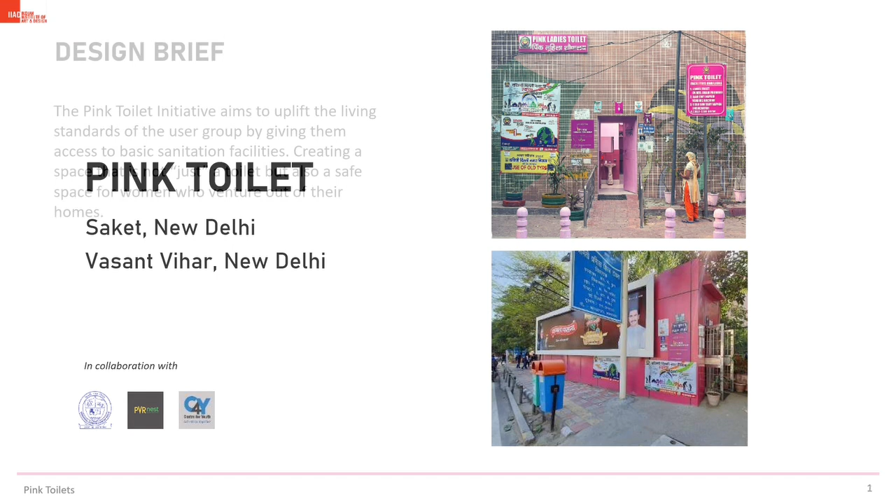The Pink Toilet Initiative aims to uplift the living standards of the user group by giving them access to basic sanitation facilities, creating a space that is not just a toilet but also a safe space for women who venture out of their homes. The task at hand is to redesign the toilet into a socially inclusive space for women of all strata of society.

It provides a space for resting, social interaction, bathing, menstrual hygiene, maternal care, and using the toilet, all of which is to be maintained with minimum efforts on the part of the attendant and is efficient in energy usage. The space needs to be ergonomic in design to enhance its functionality, providing adequate privacy and comfort for users.

The stakeholders in this project are Indian Institute of Art and Design. Our institute's mission is to bridge gaps and build bridges between design, society, and industry by transforming how design is taught, learned, and practiced in India. Center for Youth, which is an NGO working for the welfare of the rural and urban youth.

PVR Nest. It's a CSR initiative by PVR working towards building a collaborative society by extending support to the vulnerable sections. South Delhi Municipal Corporation. It has introduced aspirational features in public toilets with all necessary parameters and they are well maintained by female staff.

We now move on to what exactly is a public toilet. A public toilet is a room or a small building with one or more toilets that is open to the general public. They cater to the requirements of everybody traveling through, whether a resident or a stranger. Public toilets are not maintained properly, sanitary pads are unavailable, and they are also not socially inclusive.

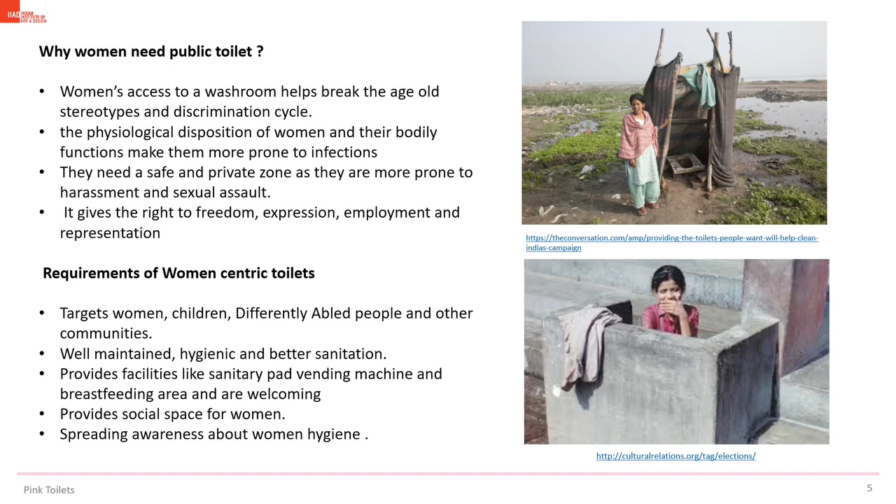Parameters. It should be easy to locate and accessible to all, including people who are differently abled. Create a functional and ergonomic toilet, which is well segregated, ventilated, and private. Provide a zone for bathing and self-care, and also provide social interaction and childcare. Provide facilities for menstrual hygiene such as incinerator, dispenser, and taps and cubicles for cleaning up.

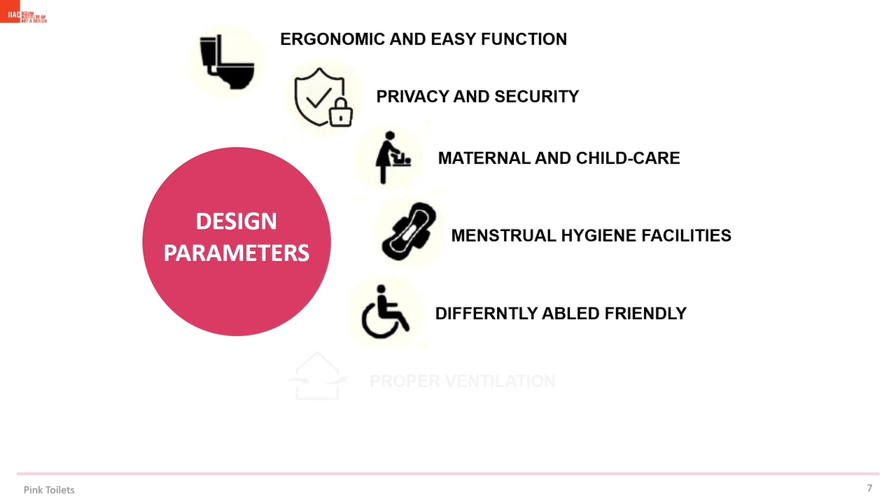These design parameters were considered through interviews, survey, and observations. We start with ergonomic and easy function, privacy and security, maternal and childcare, menstrual hygiene facilities, differently abled friendly, proper ventilation, hygiene and cleanliness. The dimensions for spaces have been taken into account after considering the national and local standards.

And now, let's lead you to the site context of both sites, starting with Anupam Saket. With our background established, let us introduce you to the context of our site. Our site, the Pink Toilet, is located in Saket, South Delhi, next to PVR Anupam. We studied the 500-meter radius around it.

Right next to our site, we have PVR Anupam in the Anupam market. The back exit of the PVR, the market staff, shop owners, and visitors are a major contributor to the crowd that uses our Pink Toilet. The presence of parks also attracts crowds which can serve as a source of potential users. We also receive users from the residential buildings mainly in the form of house help.

Various commercial buildings such as banks and offices are also spread across our location. Multiple schools are present in our area, the major one being Gyan Bharati School, along with various temples. The Press Enclave Marg along with the Mehrauli-Badarpur Road are the two major roads that serve our Pink Toilet. They merge into the Pramod Mahajan Marg, which directly leads up to our site.

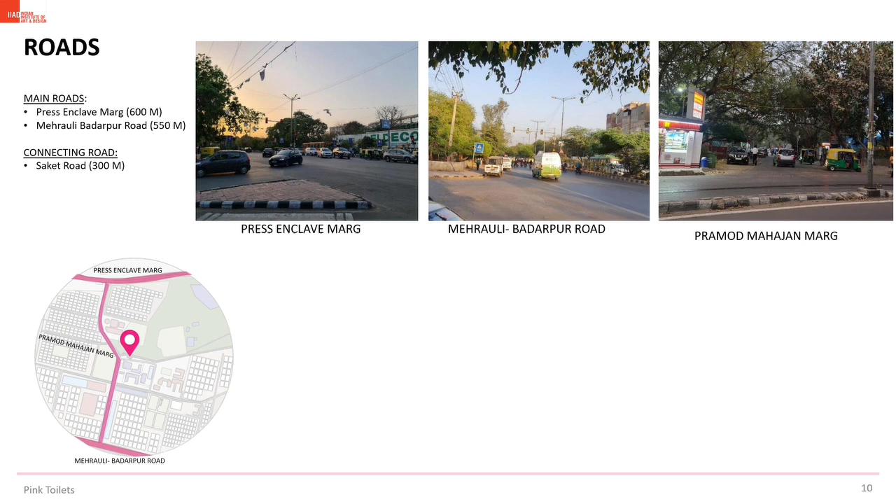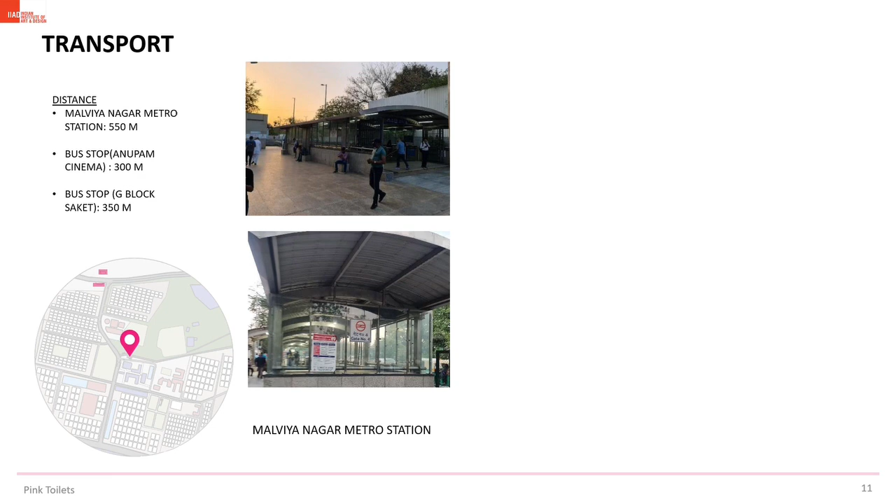Saket Road, a major internal road, also leads up to our Pink Toilet location. There is a community center road diverging from Saket Road which has less traffic leading to our site. Various public transportation modes provide connectivity around our location, which includes the Malviya Nagar metro station on the Press Enclave Marg, along with 4 bus stops, out of which 2 are located on the Pramod Mahajan Marg called Anupam Cinemas, while the other 2 are located on the Saket Mandir Road called G Block.

The site does have some problems. It's located with a temporary settlement on its left, a men's washroom and a garbage collection center on its right, and an open sewer right behind it. It thus does not have the cleanest surroundings.

The sunken courtyard leads to a stagnation of water which is amplified by the limited number of floor traps available for cleaning. The open courtyard also brings the walls in direct contact with water, leading to problems like seepage and mold.

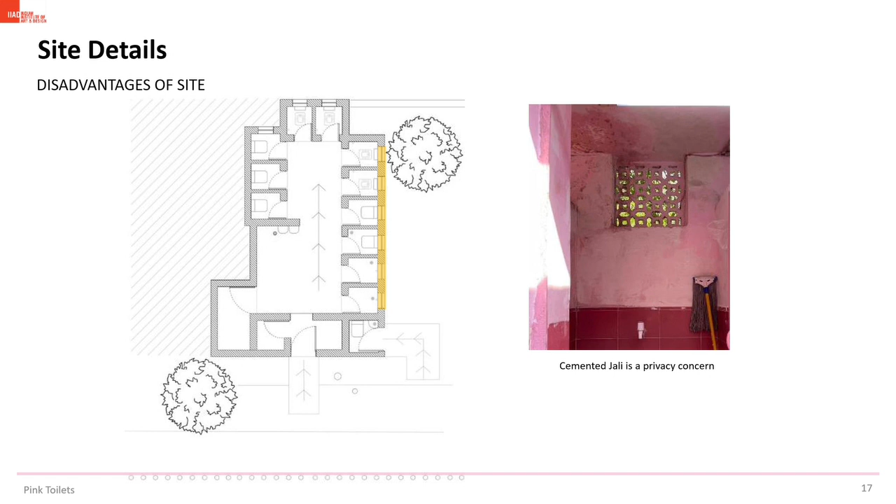The open wet area creates a humid environment in the summers, which is ultimately an unpleasant experience for the users and attendant alike. The cement jaalis given for ventilation prove to be a privacy concern because of their dimensions and positions in the washroom stalls. Storage solutions for the attendant's or the users' belongings or cleaning supplies are not present at the site, leading to makeshift arrangements which are unsafe and inadequate.

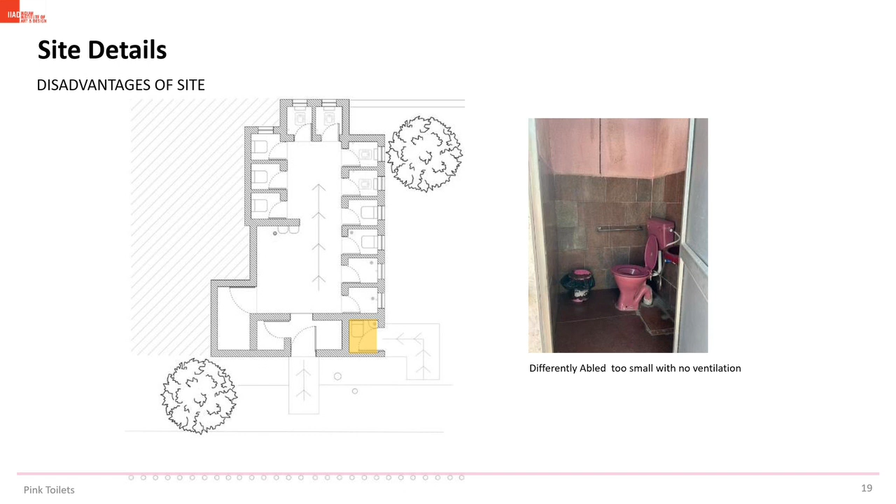The stall for the differently abled does not have enough space to fit in a wheelchair, and it doesn't cater to their needs properly. Additionally, there is no form of natural or mechanical ventilation in the stall itself. The water pipes at the site are currently exposed, making them prone to damage and a huge hygiene and maintenance issue. Although the menstrual hygiene facilities at the site are available, there is no information or awareness of how to use them properly, making them redundant.

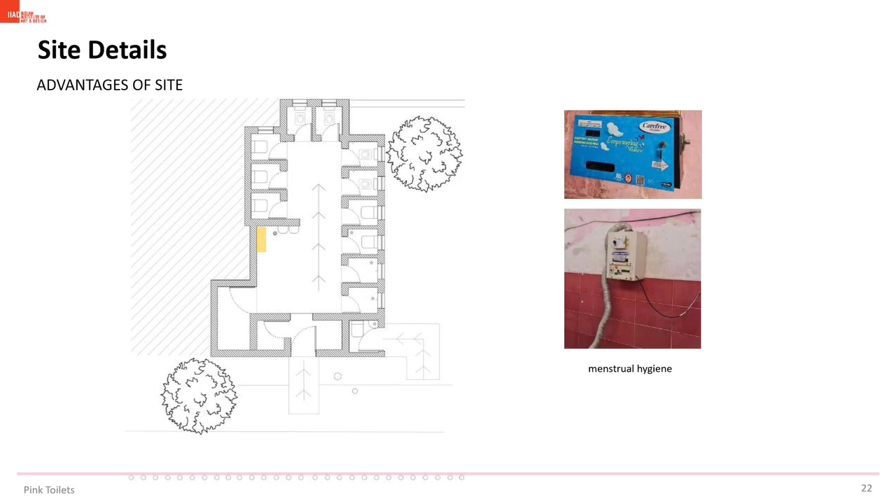The site also poses some advantages. The open courtyard ensures that there is a continuous flow of air through the site, keeping it ventilated. It promotes proper menstrual hygiene by providing facilities like a sanitary napkin dispenser as well as a pad incinerator for proper disposal. The choice of picking between a Western and an Indian toilet is also given to the users based on their preference.

Based on the factors we just described, we came up with two proposed plans that we thought will be the most suitable for our site. And this is the first one out of them. This plan has 9 cubicles just like the current site, except the number of Indian and Western toilets has been changed. Instead of 4, we now have 5 Indian toilets, and instead of 5, we have 4 Western toilets. This change was mainly due to the survey and interview responses, where people said that they prefer Indian toilets over the Western ones due to the low contact.

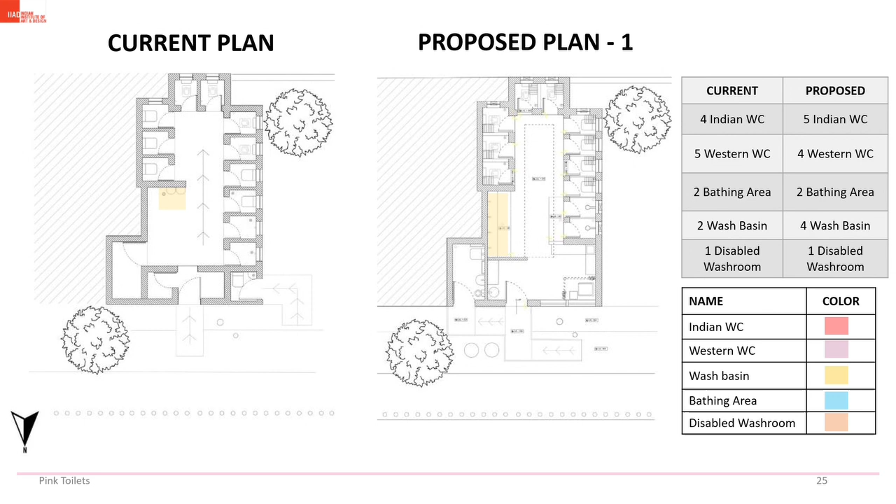The number of wash basins was also increased from 2 to 4 with 1 wash basin per 2 cubicles, while the number of the bathing areas and the differently abled washroom remains the same. Our plan is effectively divided into a wet and dry zone, which ensures that the water from the wet zone doesn't penetrate in the front of the washroom.

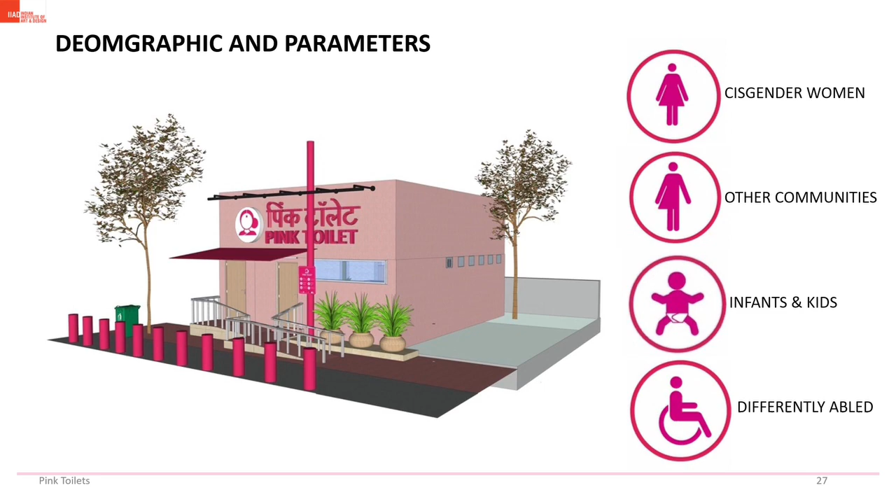From the very beginning, it was ensured that this design fulfilled the needs of all its target audience, that is cis women, other communities, children and differently abled individuals, and also provides them with a sense of security and privacy. That is why, right at our entrance, we have an ergonomic ramp made according to government guidelines with a comfortable slope that can be used both by the differently abled and the regular users.

Leading from the ramp is a differently abled and kids washroom. Since not many differently abled users approach the site, we turned it into a universal zone that can be used by the differently abled, mothers and kids. During our survey, many kids from the surrounding slums expressed a fear of falling into the adult-sized toilets, and that is why we provided a smaller size toilet for the kids.

This washroom is also equipped with a diaper changing table. The washroom itself is made following all the government protocols and has adequate space for the wheelchair to turn around and for a caretaker to accompany the child. Standing right outside the entrance to the main washroom, you will observe that there is no visibility inside the space from the exterior due to the presence of a partition wall. This wall ensures the privacy of the users.

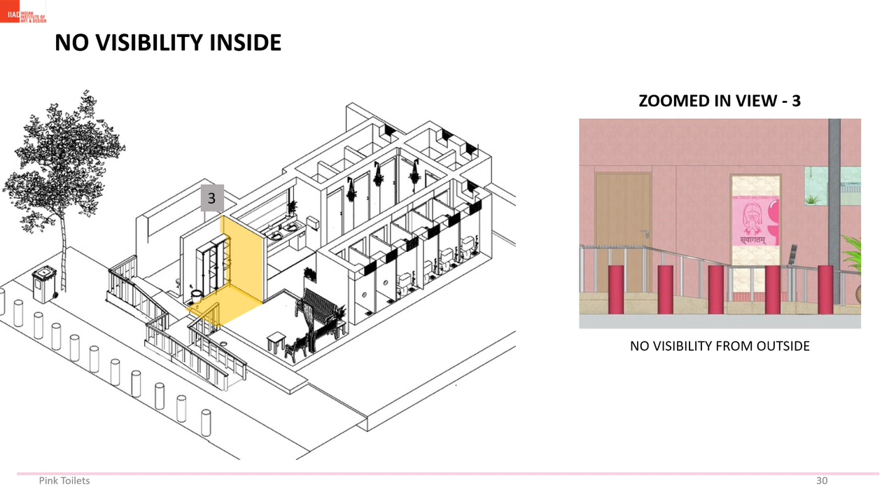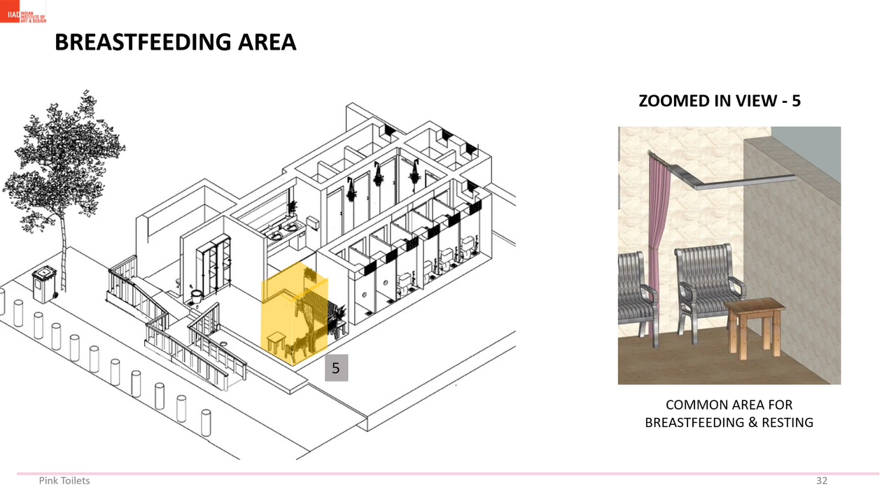When you step foot into the washroom, you will be entering a sitting and resting zone. This consists of benches with back support made with stainless steel, which is easy to maintain in the moist washroom environment. The objective of this area is to encourage positive social interactions. A half partition wall separates this area from the rest of the washroom. A curtain with a rail is also provided that can transform this social space into a private zone. This is mainly intended to be used for breastfeeding and resting.

Located here itself is our attendant area. This is oriented in a way that she has a constant view of the entrance and is able to supervise those coming in and going out.

Going forward, we have our 2 bathing areas that can alternatively be used as a wet and a dry zone. Since most people coming to shower come during the early hours of the day, during the later half, the attendant could divert such crowd to one of the cubicles while the other one can be used for changing.

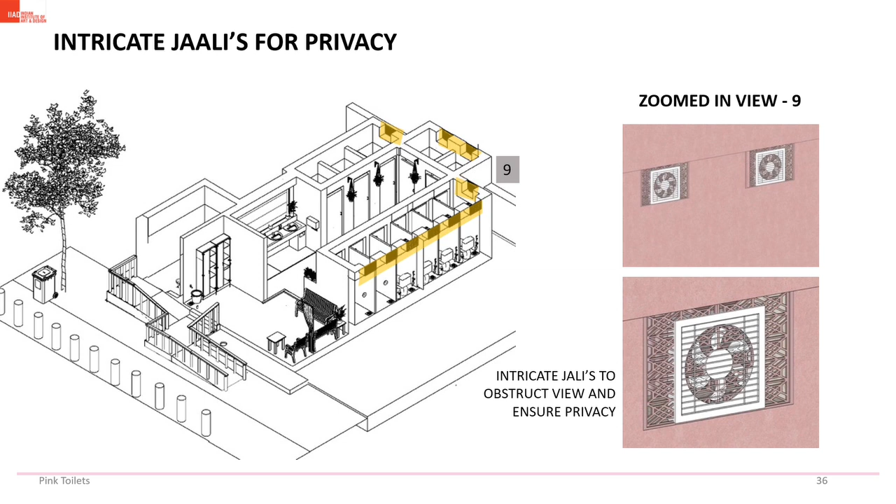The doors of our cubicles are strong, sturdy, with good quality locks, while our wall openings are fitted with intricate jalis which allow ventilation without giving a view inside the cubicles. This further creates a sense of security amongst the users. The cubicles itself are ergonomic and functional, wherein our door sizes were adjusted and opened inwards so as to not obstruct the circulation outside, while also giving space to the person inside to open and close the door.

While the needs of the users are often taken care of, sometimes the needs of the people working at the site are ignored. That is why in our design we ensured that the needs of the attendants are considered. Hence, we provided a janitor's closet with a tap for filling bucket. This is adequate storage for all the cleaning chemicals and the personal belongings of the attendant.

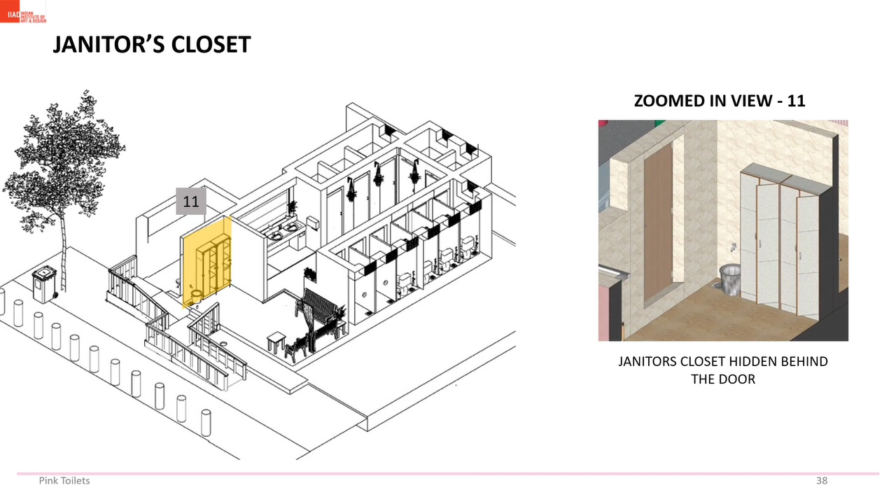Other facilities at the site include provision of pad incinerators, dispensers, and taps within the cubicles for women to clean up during their menstrual cycles. Racks inside the cubicles to store the larger handbags that women often carry, along with door hooks. Provision of perforated rubber mats on a recessed floor below the wash basins and outside the bathing areas to catch water spillage and prevent water tracks across the washroom.

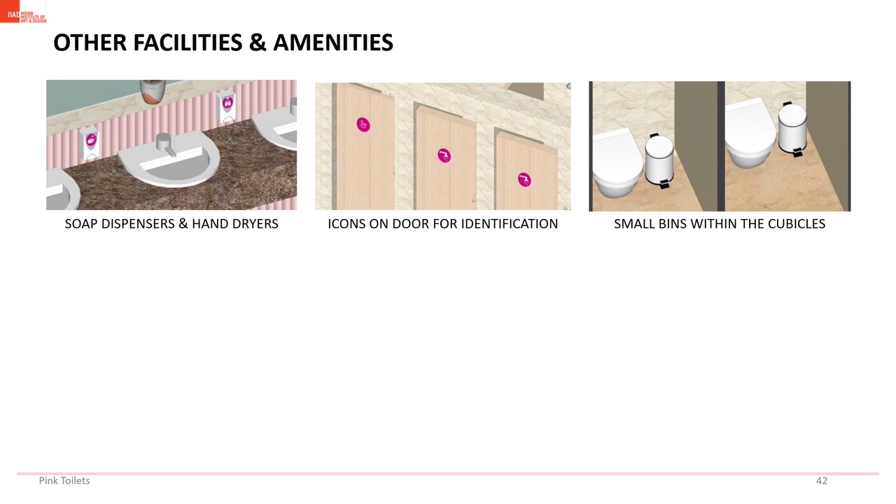Provision of hand dryers and soap dispensers. Icons on the cubicles so as to inform the users about the facilities available inside. Bins in every stall for disposal of sanitary napkin, along with dustbins below the wash basins to throw the tissues, and plenty of space to put up the posters.

Our site has an open courtyard typology which makes us prone to a lot of issues. In contrast, we are proposing a sloped roof made with polycarbonate sheet resting upon an aluminium frame with louvers and exhaust fans. This transparent sheet will block the rain, preventing waterlogging, allow the daylight to enter the site while diffusing the sunlight, thus reducing the heat ingress, while the louvers and the exhaust fans will eliminate the stench that comes from the surrounding garbage collection center and drain.

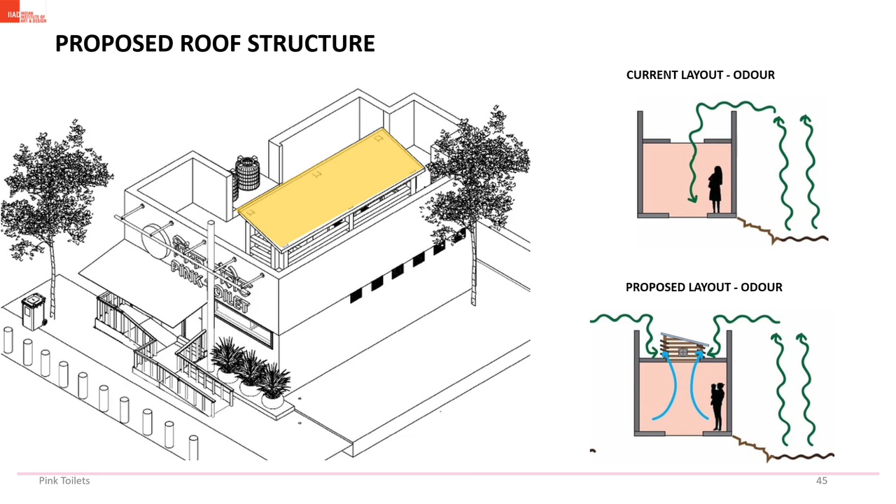Our attempt to make our site low maintenance went beyond just design and also assimilated with our materials. We used vitrified anti-skid tiles as they are suitable for rough use, considering the heavy footfall that comes into the washroom. For the walls, we used porcelains as these surfaces do not receive a lot of pressure and hence are not prone to cracking and chipping. The warm tones and pattern give a washroom a richness compared to the typical antiseptic look associated with the public restroom.

We went with ceramic wash basins and toilets as they are affordable and easy to maintain, while the push-button brass taps with a foam flow save water and give a satisfactory user experience. All this was kept on top of a granite slab to provide the users a space to keep their belongings while washing their hands. We used HPL boards for the bathroom doors and partition as it's waterproof, scratch resistant and durable while also being affordable, while our janitor's closet is made with waterproof plywood.

For the accents, we continued to use our signature pink to create a connection between the brand name and the interiors. While for the plants, we use spider plant, which reduces the amount of formaldehyde present in the environment, a toxin commonly found in bathroom cleaning chemicals.

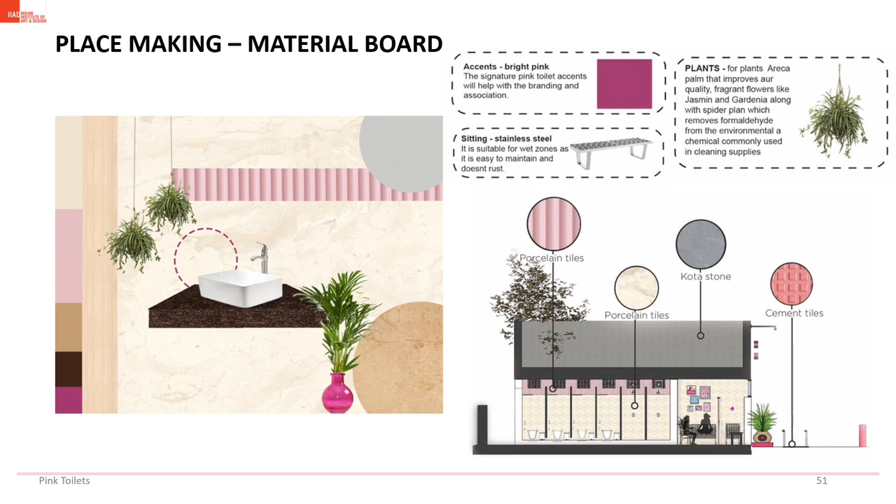For our roof, we used unpolished Kota stone as it's affordable, non-porous and its unpolished surface prevents slipping. For the walls, we use cement tiles as they are affordable and easy to maintain while also being porous and hence they allow the walls to breathe, preventing mold growth and regulate internal temperature. The checkered cement tiles have also been used on the footpath and the ramp as they are heavy duty and improve the grip while walking, while aluminium sheet has been used for the roof overhang to block the rain and light.

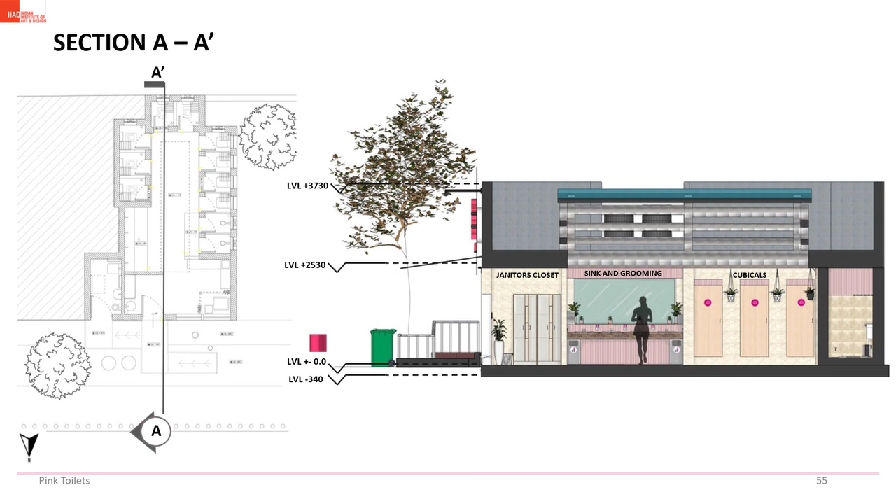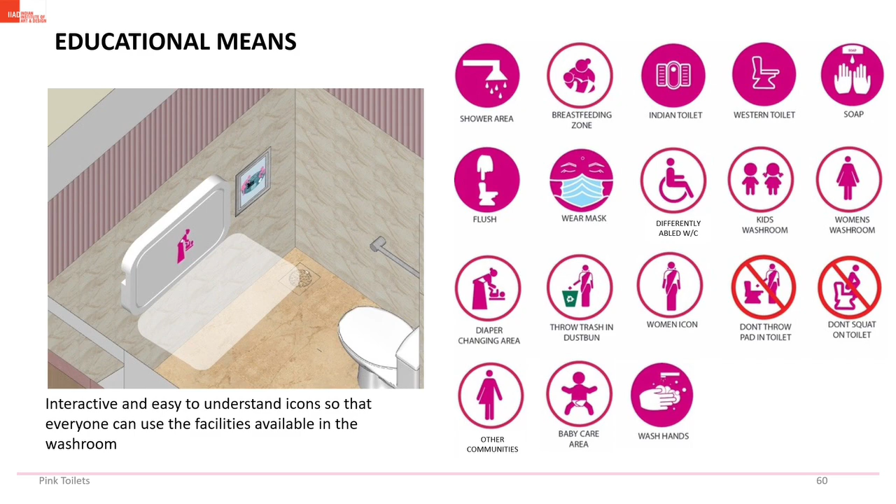We have also placed interactive and easy to understand icons all over the washroom so that even somebody who's illiterate will be able to understand these and use all the facilities within the restrooms. We also placed manuals on how to use the pad incinerators and dispensers in both Hindi and English, while inside the cubicles, A4 size posters have been provided right at the eye level so that the users can give it a read while using the washroom.

These cover a wide range of topics ranging from breast cancer awareness to encouraging women to use our pad dispensers, women education, childcare, menstrual hygiene, and so on. Our site has several advantages when it comes to lighting due to the open courtyard typology and because of the fact that it's not open beyond 7 p.m.

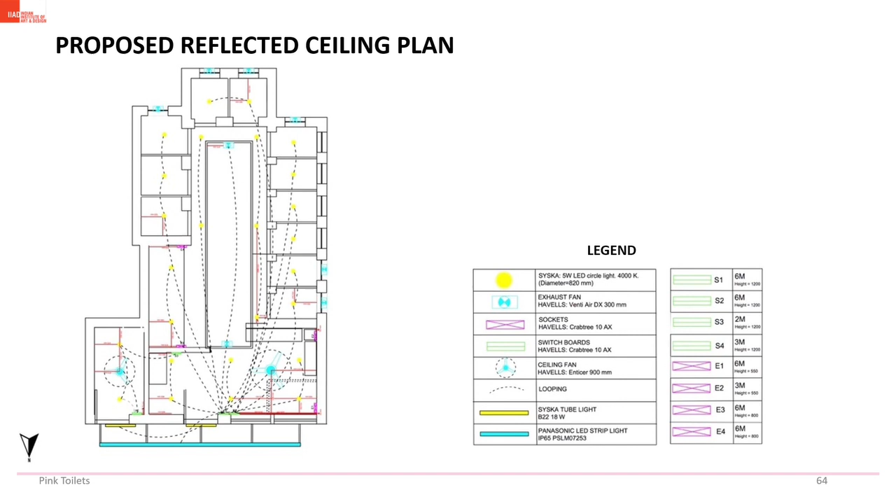However, we do realize that the option as to whether to use these lights or not should be left upon the users. That is why we provided adequate lighting throughout our washrooms. We also provided fans on top of our resting areas to ensure that the people sitting there are comfortable, and we also ensured that our entrance is well illuminated.

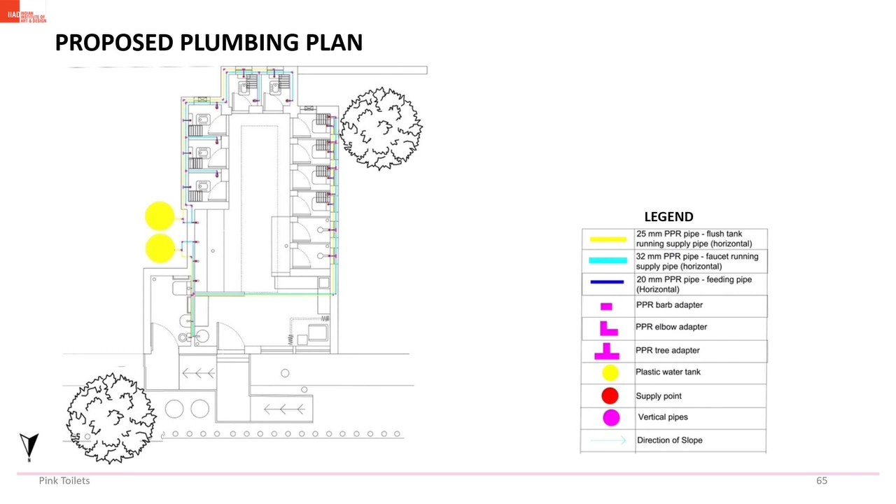Our current plumbing is very old and we are unsure of its conditions. That is why we are proposing a new and improved plumbing consisting of 2 pipes that supply the flush and the faucets for an uninterrupted water flow. At the current site, most of our inspection chambers are located inside the washroom, which creates a problem whenever a plumber needs to come in. That is why we ensured that all our inspection chambers are located outside the site for the privacy of the users.

All in all, our redesign plan has a well-defined and ergonomic entrance which caters to privacy, has an ergonomic kids and differently abled washroom with a well-defined sitting area, an area for self-grooming, along with functional cubicles, overall making it a better design than the one we have at our present site. Now that you're familiar with our first plan, let us show you our second one.

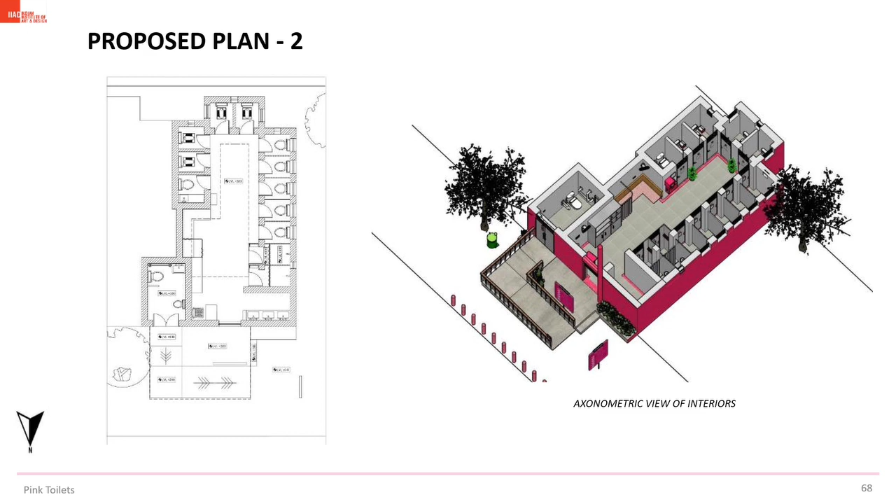This is our second proposed plan. It has been designed considering all the shortcomings discussed in earlier slides, and we aimed at utilizing every space to its maximum ability. As we compare the current plan with our proposed plan, you will notice an addition of a Western WC, an inbuilt sink in one of the stalls, and the provision of changing rooms attached to the existing bathing areas.

Moving ahead with many more such facilities, you will find hoardings placed outside the toilet for easy identification of the site. The hoarding facing the main entrance mentions all the available facilities within the toilet, and its back provides you with all the necessary women helpline numbers and the job vacancies available nearby. This hoarding has another very important purpose to solve, that is, it acts as a barrier for the passerby to look directly into the toilet, thus maintaining privacy.

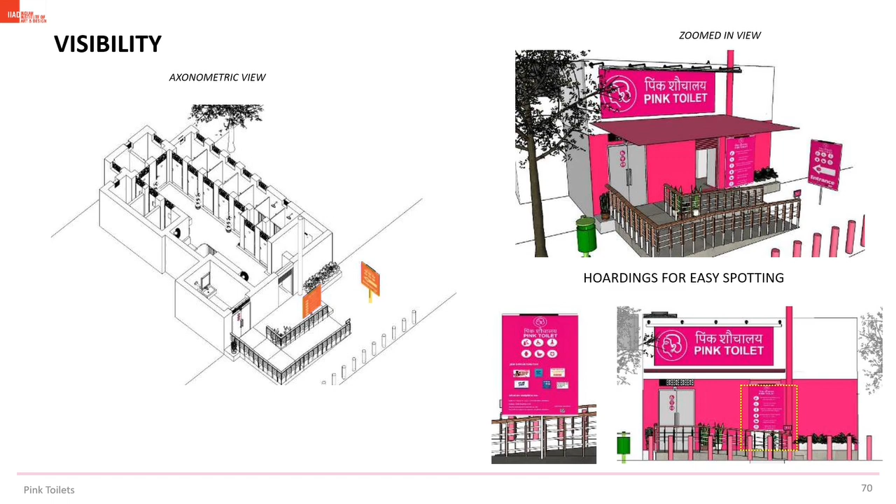Considering everyone's comfort, we've even proposed a differently abled ramp designed as per the standards. Its slope is gentle enough that a differently abled person can easily access it without anyone's assistance. After walking up the ramp, you'll enter the differently abled and kids washroom. This stall has enough space for a wheelchair to enter and move around to access various facilities. With the WC's proper sizing and supporters provided, the toilet becomes efficient enough to be used independently by its diverse users.

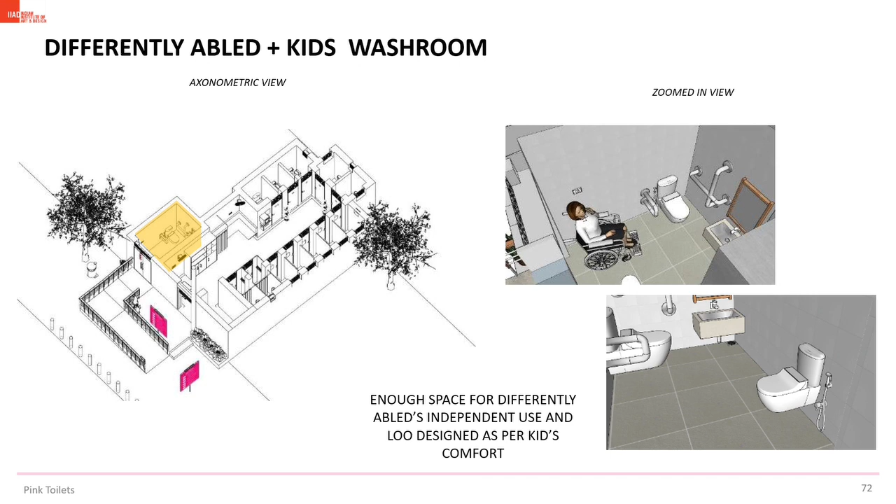Now, as we move through the main entrance, you will find the attendance counter on the left. It is positioned in a way that the attendant gets a clear view of what is happening inside as well as outside the toilet. She is aware of who all are entering the toilet and what all activities are taking place inside the toilet.

Next to the counter is the steel cabinet, which consists of 4 lockers for the users to keep their precious belongings, and then we've even proposed a big open shelving system for the shoppers to keep their big heavy bags, and the bottom 3 shelves are for the janitor to keep the utility items for toilet sanitation.

Moving forward, you will come across the seating area, which can accommodate 5 to 6 people. This area even contains a private zone that can be converted into a public space just by a pull of curtain. The private zone is mainly for a mother to breastfeed. For a comfortable seating experience, we've even proposed a wooden backrest with a rounded edge granite top.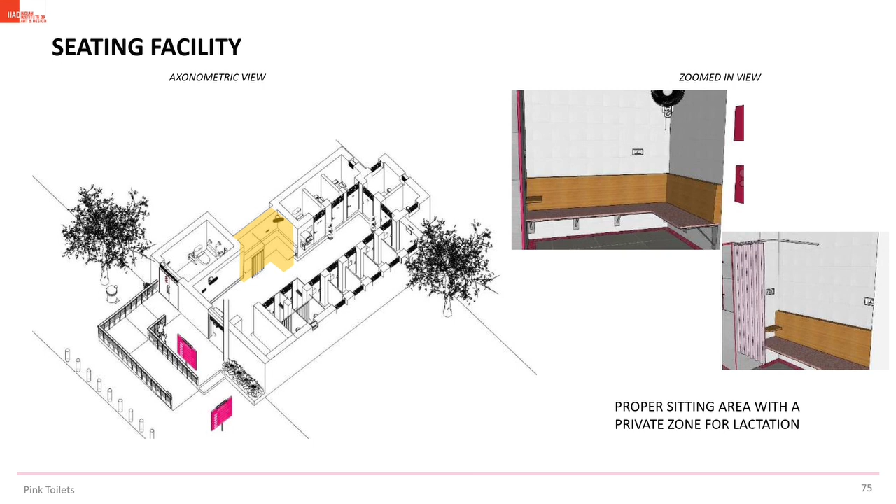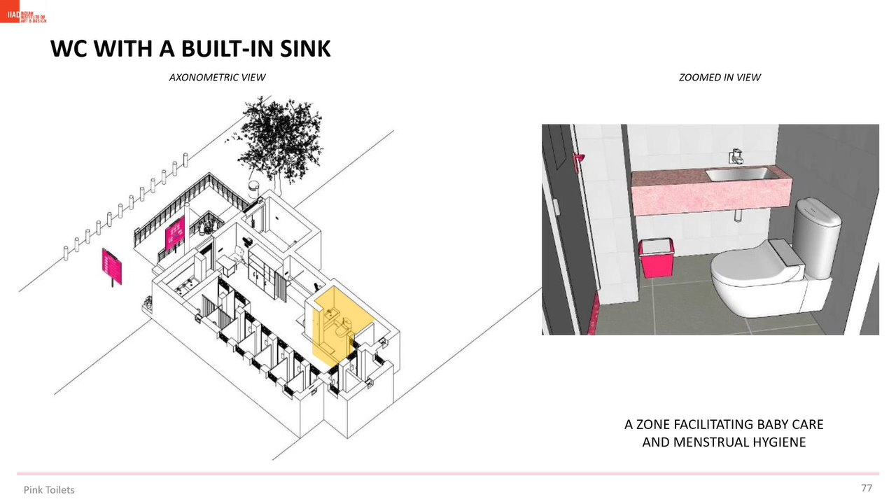One of our other significant facilities includes a built-in sink in a stall to facilitate baby care and personal hygiene for menstruating women. On the other side of the toilet, we've proposed 2 bathrooms, and attached to them is a changing area separated by a curtain and a depression of 15 mm in the bathing area so that water doesn't flow into the changing area and the distinction of the dry zone with the wet zone remains maintained.

We have even proposed awareness posters on the back doors of every stall so that the users are aware of the basic do's and don'ts that are to be followed in a washroom to maintain its sanitation.

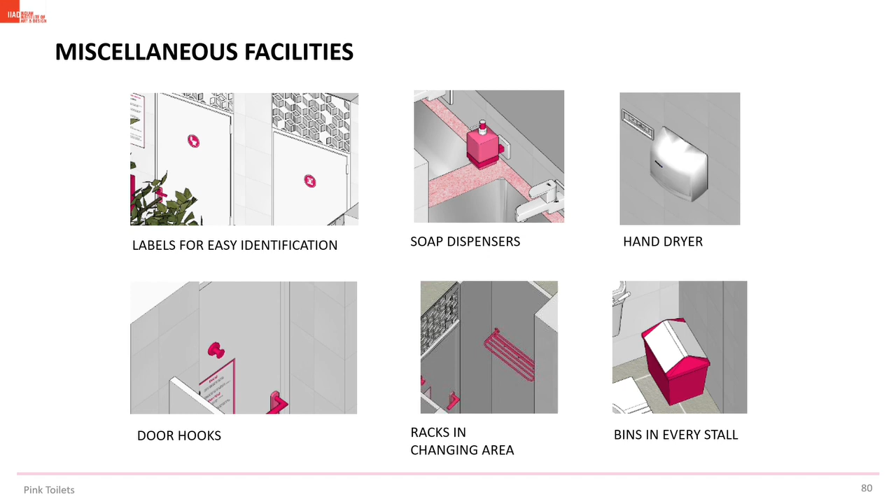Some other miscellaneous facilities include labels in front of every stall door so that the user knows what to expect inside the stall. Then, we have proposed soap dispensers and a hand dryer near the sink area, and there are door hooks provided on the back door of every stall so that users have the option of carrying their stuff with them. There are racks provided in changing areas for users to keep their clothes, and there are bins provided in every stall to prevent littering on the floor.

We have proposed covered roofing made of polycarbonate sheet to prevent water clogging in the toilet during rains, and due attention has been given to the ventilation system by placing the sheet at a certain height from the terrace.

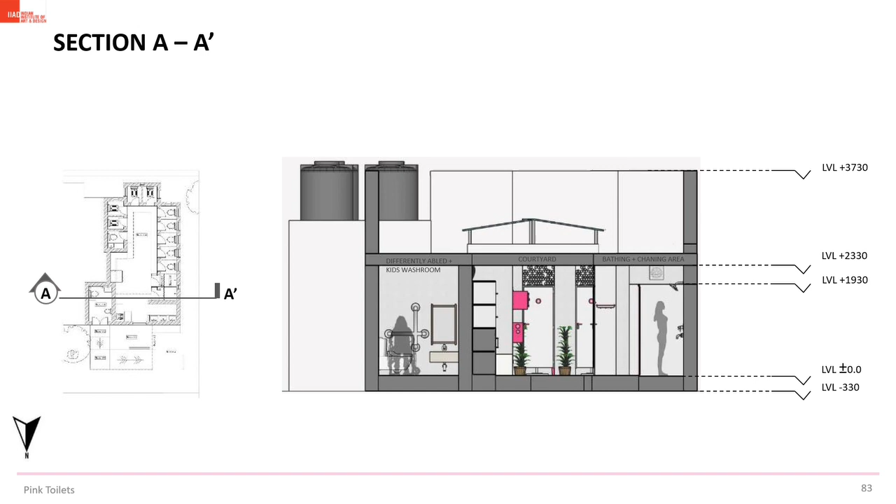Talking about the various materials proposed, we'll begin with the cream metallic HPL sheet used for the doors and partition walls, as it is low maintenance and easily available at economical rates. For roofing, we've used a transparent polycarbonate sheet which is stronger than glass and can resist even the harshest of weather. It even protects from harmful UV rays.

For the WCs, we have proposed white ceramic, which is cheap and easy to clean, and for the curtains, we proposed polyester fabric that is washable and resembles any natural fabric in softness. Our cabinetry is made of steel, which has long durability and is non-corrosive. The walls are tiled with light grey porcelain, which is resistant to wear and moisture and is even easy to clean.

For the planters, we've proposed money plants inside as they are natural air purifiers, while for the outside, we've proposed cactus to keep the stray animals away and snake plants, which are another good air purifier.

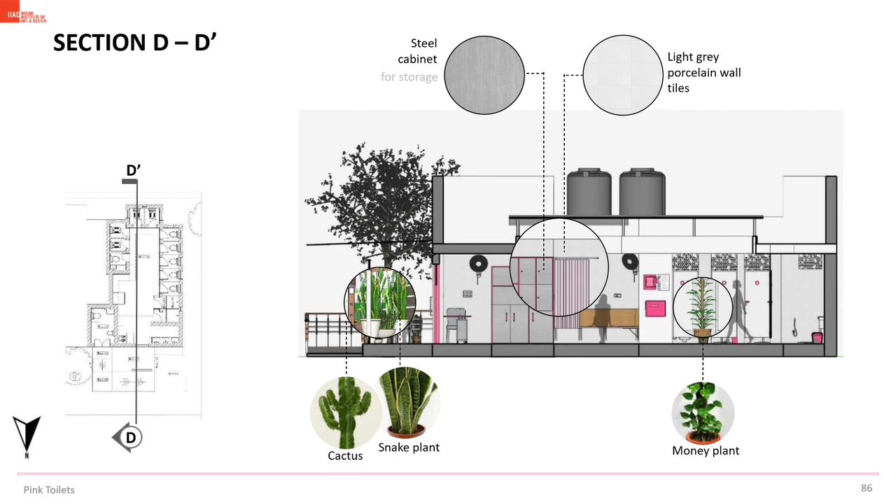For the flooring, we've proposed Kota stone, which is a non-porous anti-slip natural stone that is ideal for hygienic flooring, and the same has been bordered with a thin line of pink terrazzo to add the essence of pink toilet to it. Our seating and countertops are of granite, which is sanitary, non-porous and durable.

Our stalls have been designed in a way that there are openings available on all the sides for easy movement of air so that no foul smell stays within the washroom, thus ensuring proper ventilation throughout the toilet.

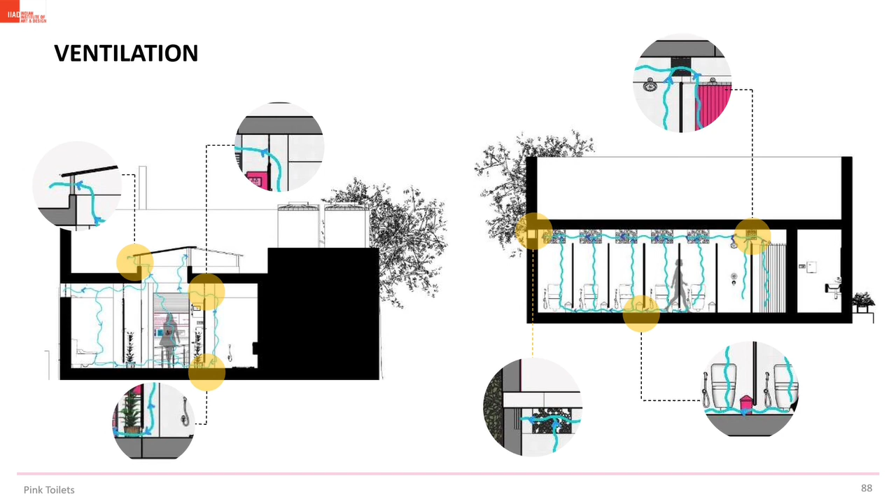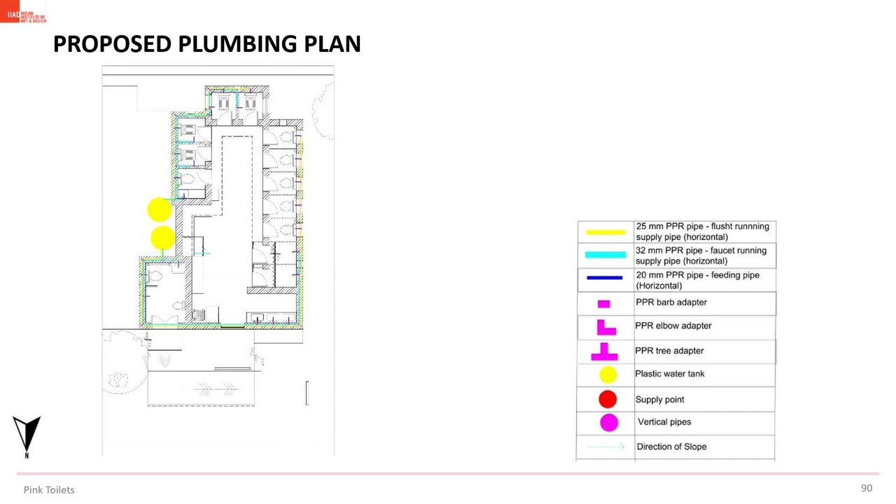Our current plumbing is very old and we are unsure of its condition. Thus, we have proposed new plumbing based on the advice of the plumbing experts. This is our drainage plan at the current site.

Most of our inspection chambers are located inside the toilet, which creates a problem whenever there is an issue as it hampers the normal functioning of the toilet. Thus, to avoid such a situation, we have proposed the chambers outside the toilet.

Overall, our proposed plan provides you with a more ergonomically efficient entrance with a ramp facility and aims at creating a universal zone through the differently abled and kids washroom. It provides you with a well-defined seating area and 10 stalls properly equipped with all the facilities. It even consists of a separate changing and bathing zone that are well distinguished. All of these well-thought facilities make our proposed plan a much better design than the current one.

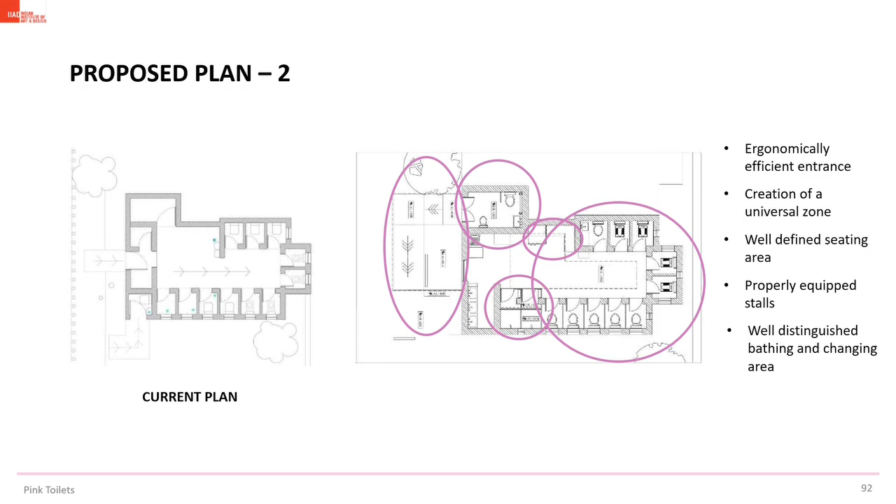These were the two options for the first site, that is Saket, and now we move forward to our other proposed plans of Vasant Vihar. Now we'll be discussing our site Pink Toilet Vasant Vihar. Starting with the site context, taking the surrounding area of 200 meters, this site is located in the center of the major landmarks like Priya Market, Vasant Vihar Metro Station and Vasant Continental, making this site an easy access for the huge footfall.

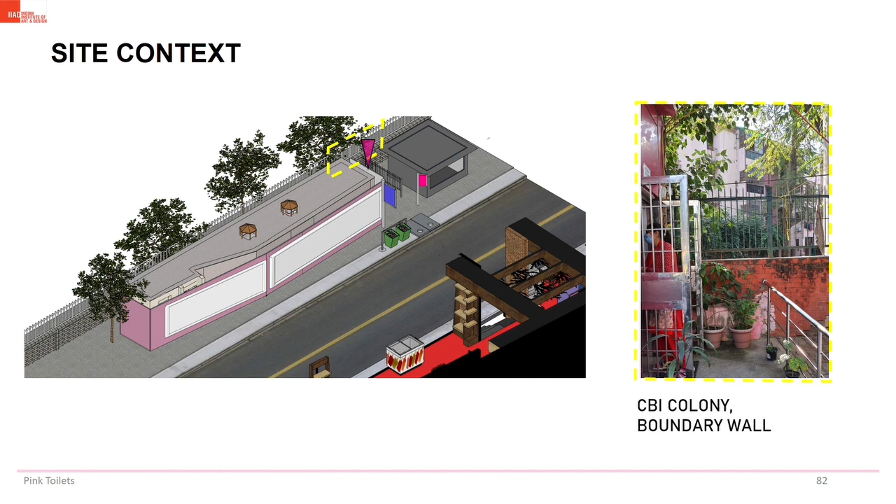Now talking about the immediate surroundings. The immediate surrounding of the site includes the adjoining CBI colony, which is at the back of the site, while Priya Market is right opposite to the front of the toilet, facing the main road, Munirka Marg. There is a police taxi booth located in the front of the entrance in the north direction. The site is located on the footpath beside the main road.

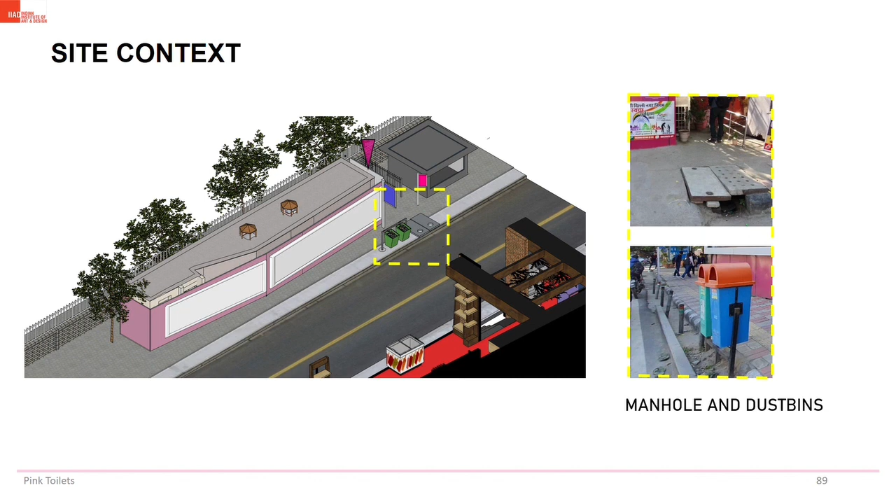The site is also covered with an aluminium fiber sheet around its perimeter where two billboards rest. There are two notice boards right outside the entrance, one being of the pink toilet and the other for the directions. There is also a manhole perpendicular to the entrance and two dustbins located on the footpath.

Analyzing the sun path and daylight on the site, these are some factors which restrict the daylight. The orientation being north does not receive much daylight and the trees overhead cause a lot of hindrance. The billboards present in the front do not allow much light to come in, while on the other hand, the skylights, entrance and the door for ventilation allow some light to enter.

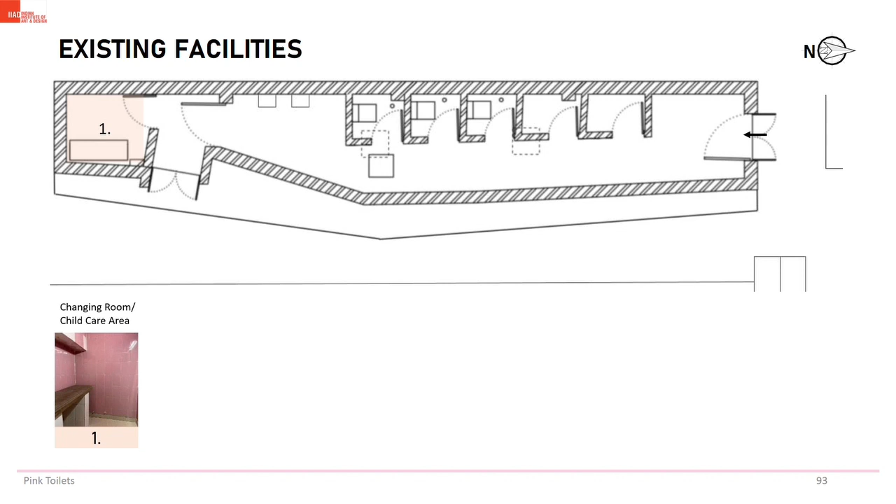These are the existing facilities available on the site. There is a childcare area and a changing room. There are two wash basins and three western WCs adjoining the attendant room and the storage room right opposite the entrance. Considering women's hygiene an important factor, there is a sanitary pad dispenser along with an incinerator.

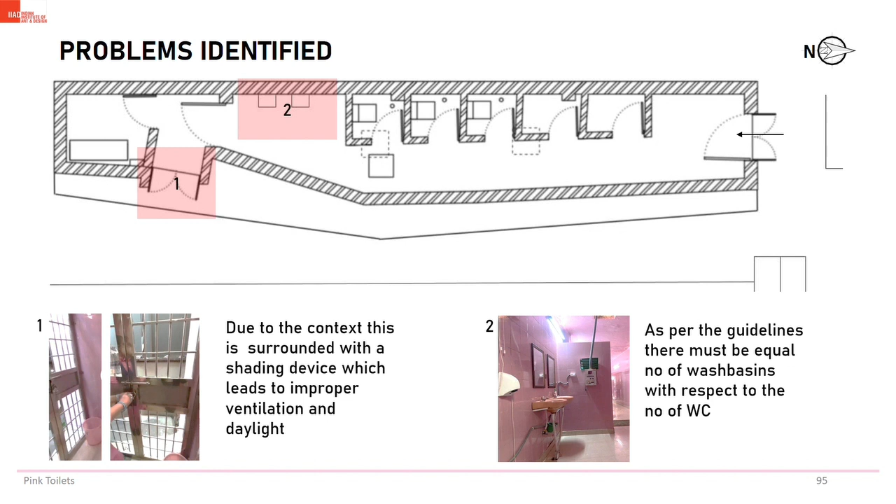Talking about the existing problems at the site, due to the context, the door for ventilation is covered with the billboards, which restricts the air to come in. As per the guidelines, there must be an equal number of wash basins to the WCs present, which has not been applied here. There is also a need for an Indian WC due to its minimal contact, which was derived through surveys and interviews. The door swings open very close to the WC, hampering the accessibility and usability of that area.

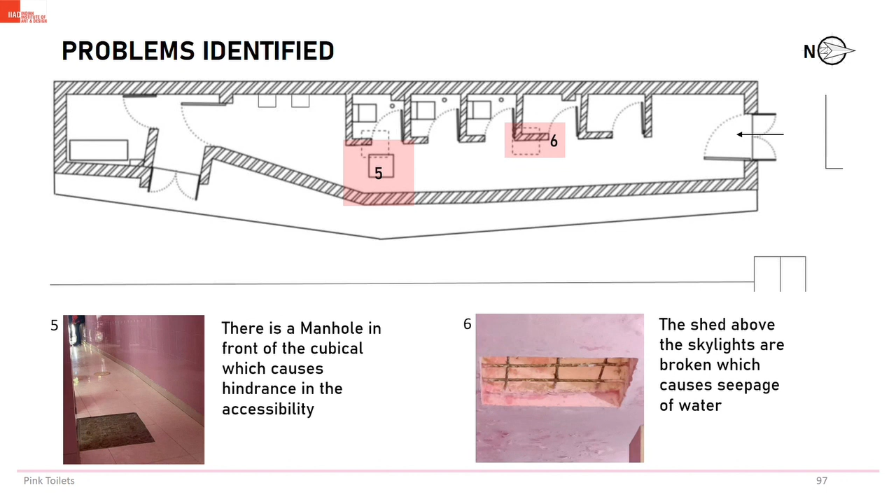Further, there is a manhole in front of the cubicle which causes hindrance in accessibility. The skylight located on the ceiling is covered with broken sheds causing seepage of water. The taxi booth located opposite to the entrance has male guards, which raises a privacy concern. And the site being located on the broken footpath causes hindrance for the differently abled to access the space with ease. We will be proposing two options for the same site. This is the first plan wherein all the facilities are clearly visible and will be discussed ahead.

Talking about the zoning of our plan, the site is divided into three broad zones. First is the zone for the differently abled to the left of the site, making it a totally different zone which is not interrupted by other zones. The dry zone is kept towards the entrance, making a clean way for people who want to wait, and the resting area is ahead with the washroom for children so the mothers can rest there. And then is the wet zone which includes the wash basins and the cubicles.

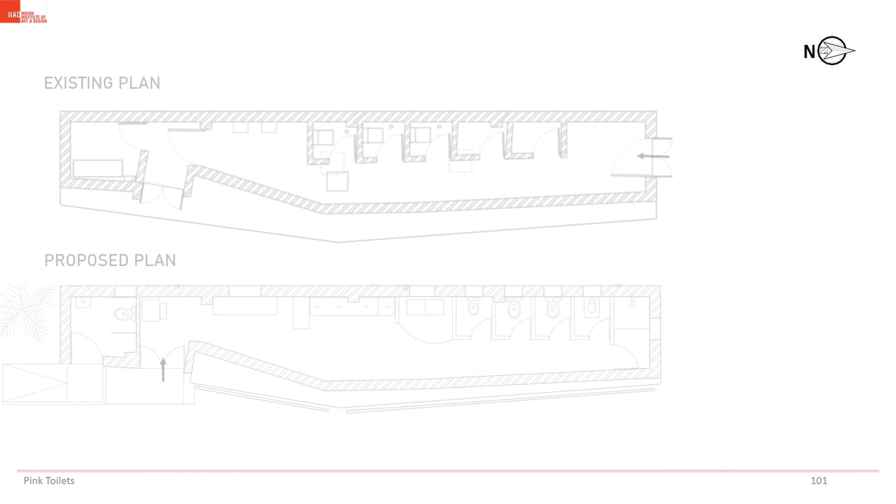In this plan, the entrance has been changed from the north direction to the east direction with a ramp made according to the national guidelines that can be used by all users. Near the entrance, a washroom for the differently abled has been provided as earlier it was not present. Also, it is designed in such a way that it can be universally accessed.

The attendant has been provided with a dedicated seating area where she could sit comfortably and monitor all the activities taking place in the toilet. A common seating or waiting area has been provided right in the beginning of the toilet so that it is not included in the wet zone and also makes it socially inclusive.

This was also not present earlier. Adjoining to the waiting area, we have a storage unit with the open shelving which will help visitors to keep their belongings. The number of sinks has increased from 2 to 4 with one sink per cubicle, out of which one is for the children.

Likewise, a childcare area and a resting area with curtains is also provided so that it can be created into a private zone which also creates openness without walls. As in the existing plan, the childcare room was not properly designed, and one Western WC for children which is made as per the standards. This change is mainly due to the survey and the interview responses.

The number of Indian and Western style toilets have been changed. Instead of 3 Western WCs, now we have 1 Indian and 2 Western toilets. Incorporating the Indian WCs was mainly due to the survey and interview due to the minimal contact. Bathing plus changing area is given, taking in mind the need of the users and the market nearby.

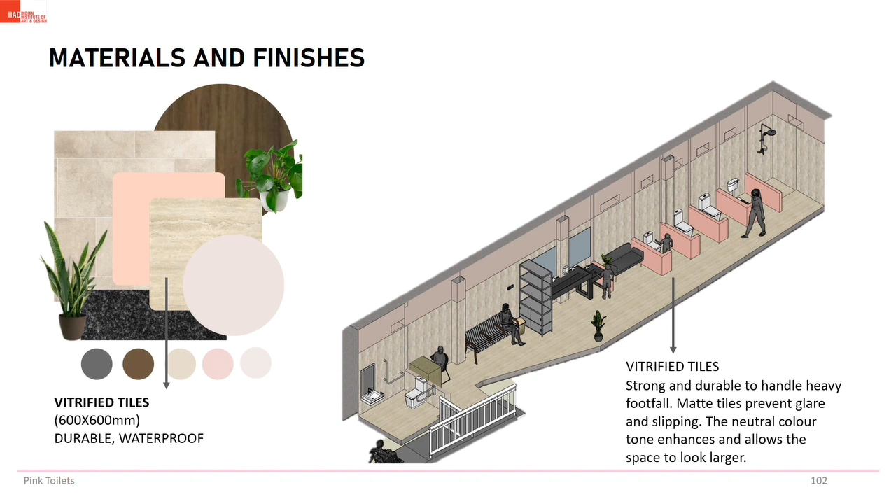The vitrified tiles have been provided for flooring as it is strong and durable. The matte finish prevents from slipping. These tiles are consistent throughout the toilet. The porcelain tiles have been taken forward on the walls as it is stain and crack free, which is also waterproof. It makes the space look spacious as it reflects light.

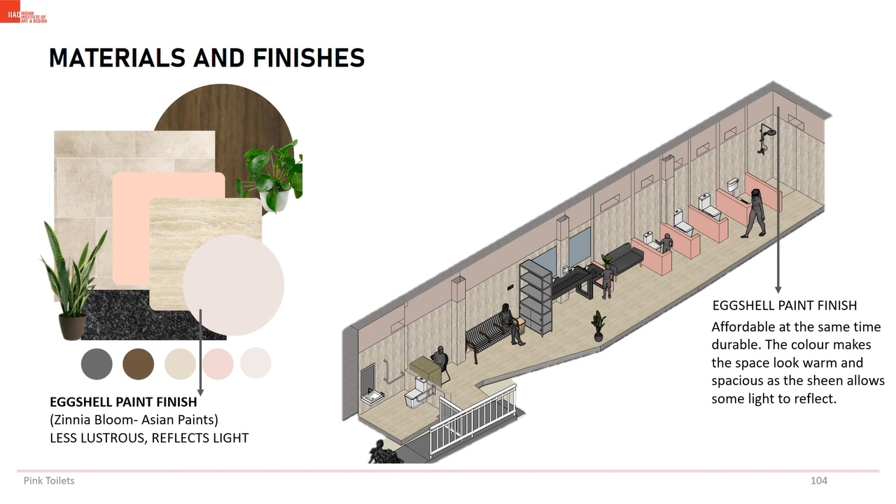The eggshell paint finish is also provided on the walls as it is durable and at the same time affordable too. The lustrous finish allows some light to reflect and hence make this space look spacious and consistent throughout. Granite has been provided on the sink slabs as it is durable, waterproof and stain free. Also, the grey color does not make it look dirty.

The fiberglass reinforced panels have been provided as the partition walls for the cubicle as it is lightweight, water and stain proof and also has flexibility in design. This is consistent throughout all the cubicles.

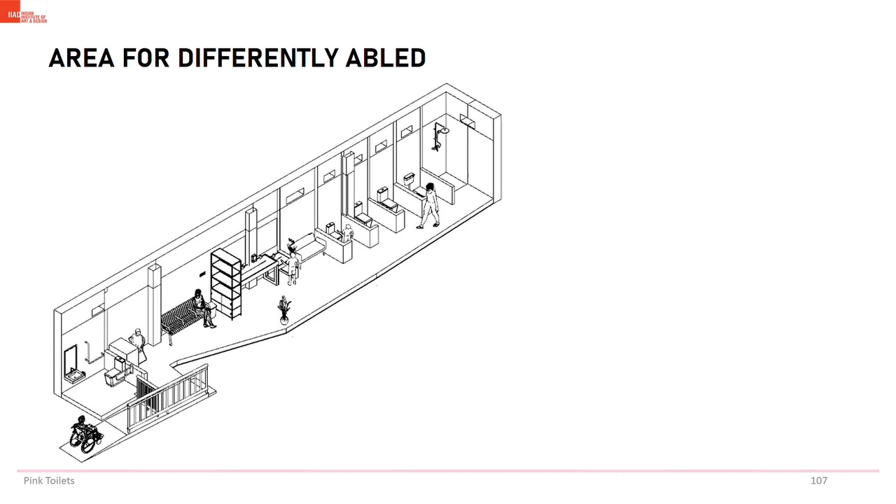This is the first proposed plan. In this plan, the entrance has been changed from north direction of Munirka Marg to the east side of the Munirka Marg, directly across the main road. There is a ramp made according to the national guidelines, that is 1:12, which can be used by both the disabled and other users. Near the entrance, washroom for differently abled has been provided, keeping in mind the requirements, as earlier it was not present. Also, it is designed in such a way that it can be universally accessed and ergonomically correct.

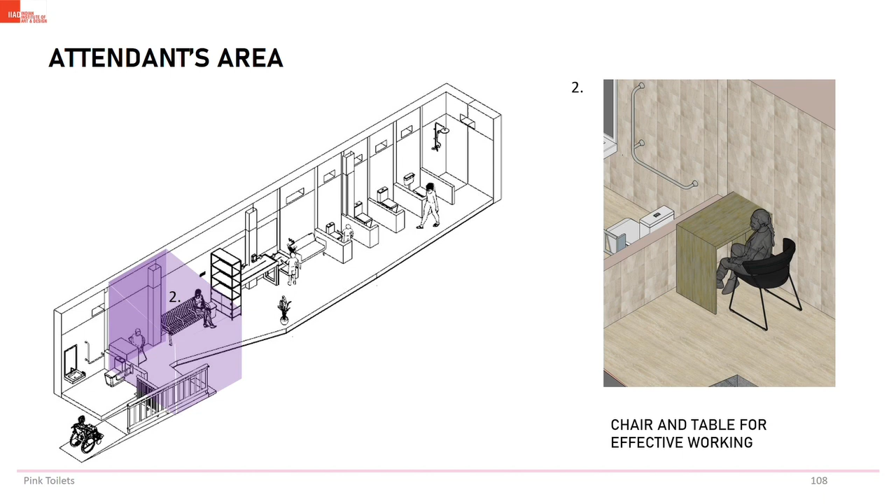The attendant area has been provided with a dedicated seating area where she could sit comfortably and can monitor all the activities happening in the area, and she can also very conveniently help the people using the disabled washroom without losing track of what is happening in the other zones. A common seating or waiting area has been provided right in the beginning of the toilet so that it is not included in the wet zone and also makes it a socially inclusive space for all the visitors and the attendant.

Right adjoining to the waiting area, we have a storage unit with open shelving which will help visitors to keep their belongings in it, and as it is near to the attendant, she could also very easily keep a check on it. The bottom 2 shelves are closed, one for the attendant to keep her stuff and one to keep the cleaning supplies. The number of sinks has increased from 2 to 4 with one sink per cubicle as per the guidelines, out of which one WC is particularly designed for children.

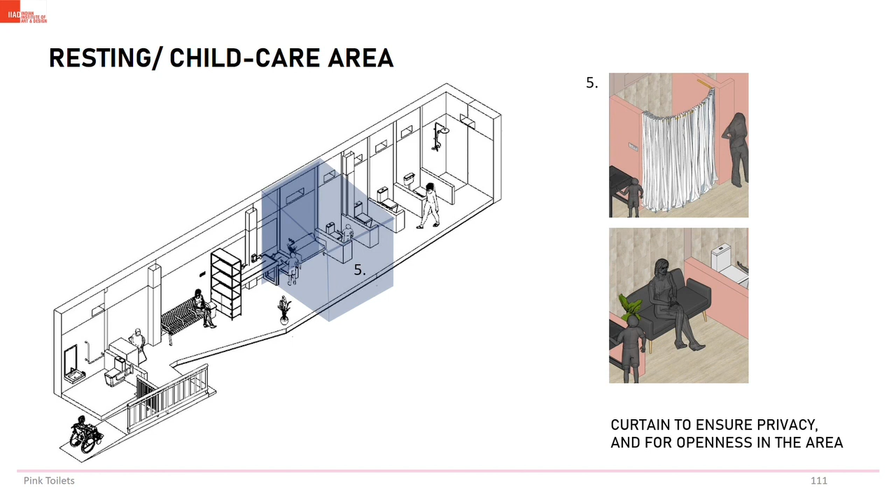Likewise, a childcare area and a resting area with curtains is provided right next to the children WC so that it is easier for the mothers to be around their child while the child is using it. And also it is made of a semi-solid partition, a curtain. Interview with a small kid on site also revealed that they avoid using these public restrooms due to the fear of falling into the adult-sized toilets. Hence, a toilet for children has been provided according to the required measurements so that they can use the toilet safely.

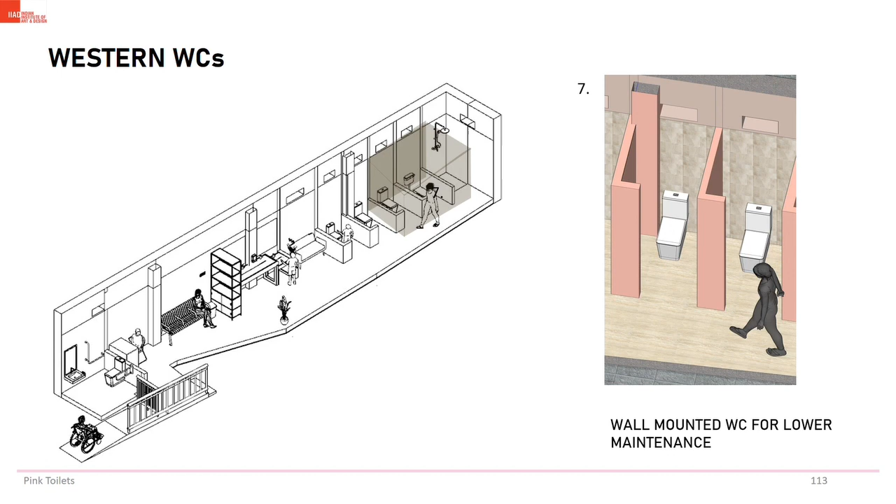In this particular plan, the number of Indian and Western toilets have been changed. Instead of 3 Western WC, now we have 1 Indian and 2 Western toilets. Incorporating Indian WCs was mainly due to the survey and interview responses, where most of the women said that they prefer to have Indian toilets due to the minimal contact. Bathing plus changing area is given, taking in care the need of users, as people come in from the nearby markets only for changing their clothes.

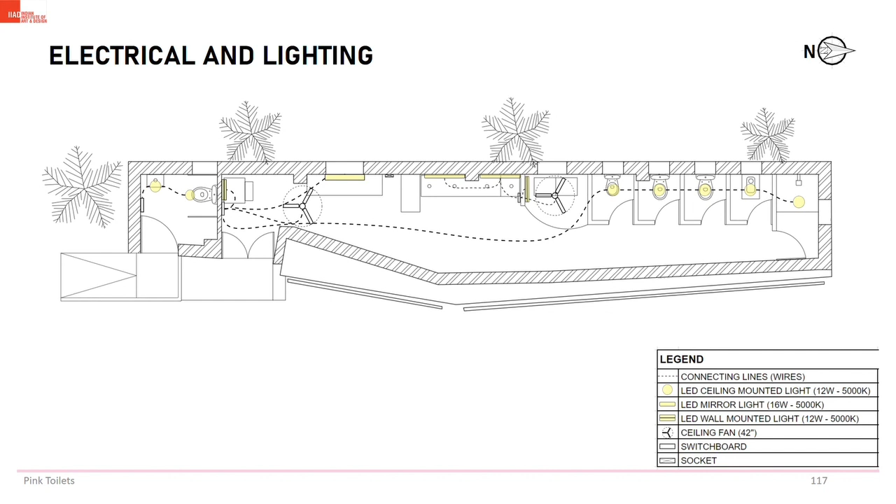Talking about the electrical and lighting, all the wires are connected to one switchboard near the attendant area so that she can easily access and regulate it. Another switchboard is given near the wash basin with a fan which can be helpful while cleaning the area. Individual ceiling lights have also been provided in each cubicle. Further, this is the second option of the same site wherein all the facilities are clearly visible and will be discussed ahead.

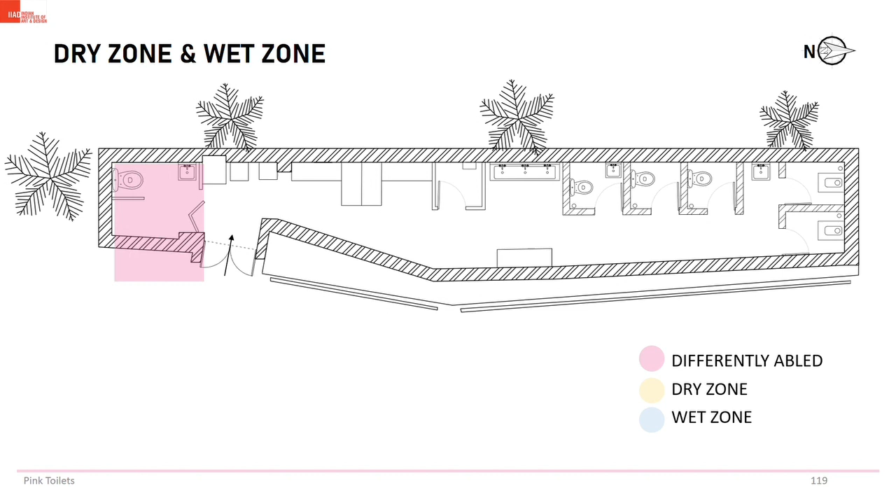Talking about the zoning of our plan, the site is divided into 3 broad zones. First is the zone for the differently abled to the left of the site, making it totally different, which is not interrupted by other zones. The dry zone is kept towards the entrance, making a clean way for people who want to rest or wait. And then comes the wet zone. This keeps the wet area away from the dry, which does not make the whole washroom dirty.

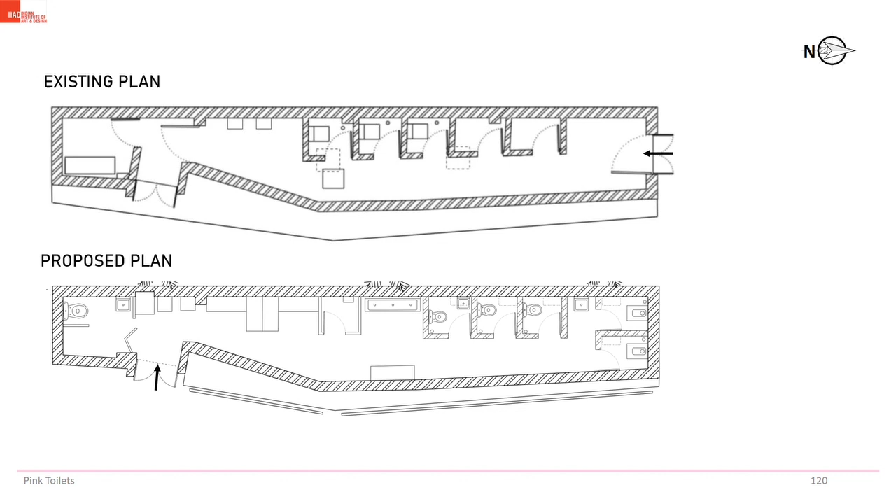In the second proposed plan, we have changed our entrance from north direction to east direction. This solves the major concern of privacy. Next, we have incorporated a toilet for differently abled, which was needed and was missing in the existing site. The toilet is placed near the entrance for easy access according to the considered standards. An attendant has been provided with a dedicated sitting area where she could sit comfortably and monitor all the activities happening in the area, which was partially present earlier.

While it is important to provide the facilities for all activities, a common area for waiting, resting, and childcare is provided to create a socially inclusive space. Beside this, a changing room has been provided. This is near the resting area so that it can be in the dry zone. The number of sinks has increased from 2 to 4, of which 3 are near the western cubicles and 1 is beside the Indian cubicle for easy access. Just opposite to the basin area, a separate open storage has been provided, considering the market nearby. Individual steel racks have also been provided inside the cubicles to provide extra space for storing bags.

Interviews with a small kid on site revealed that children avoid using these public restrooms due to the fear of falling into the adult-sized toilets. Hence, a toilet for children has been provided along with a separate basin inside the cubicles. Instead of 3 western toilets, we have 1 western for children and 2 western toilets. Incorporating Indian WCs was mainly due to the surveys and interviews, due to the minimal contact. Keeping in mind the functionality of the toilet, we made sure that all areas function well and ergonomically fit, which is currently lacking in our site.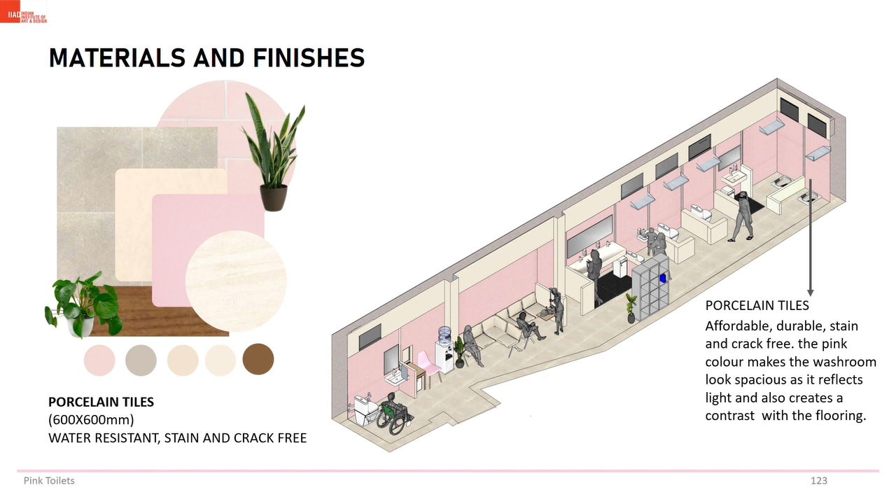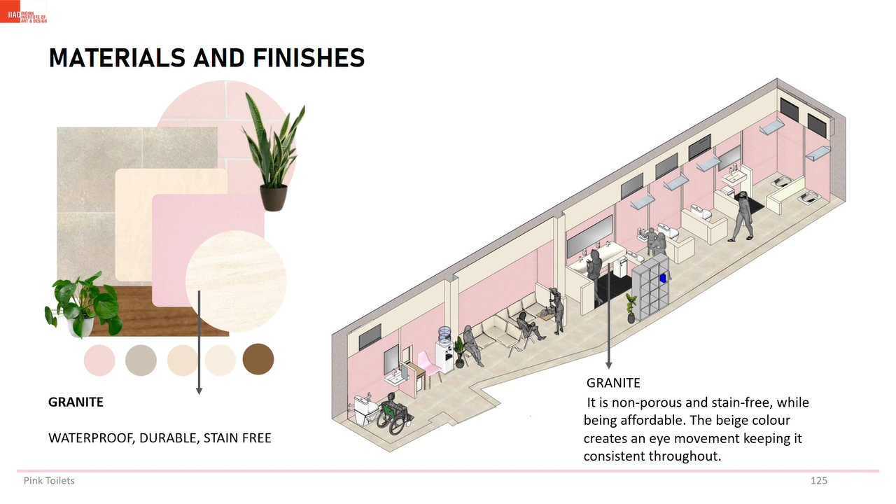Eggshell paint finish has been applied on the walls as it is long lasting and affordable. It is lustrous, which allows light to reflect and hence makes it look more spacious. The color is chosen to create a contrast with the wall tiles. Granite has been provided on the sink slabs as it is durable, waterproof and stain free. The beige color makes it more appealing with the whole theme. The fiberglass reinforced panel has been provided as the partition walls for the cubicles as it is light in weight and also a cost-effective option with flexibility in design.

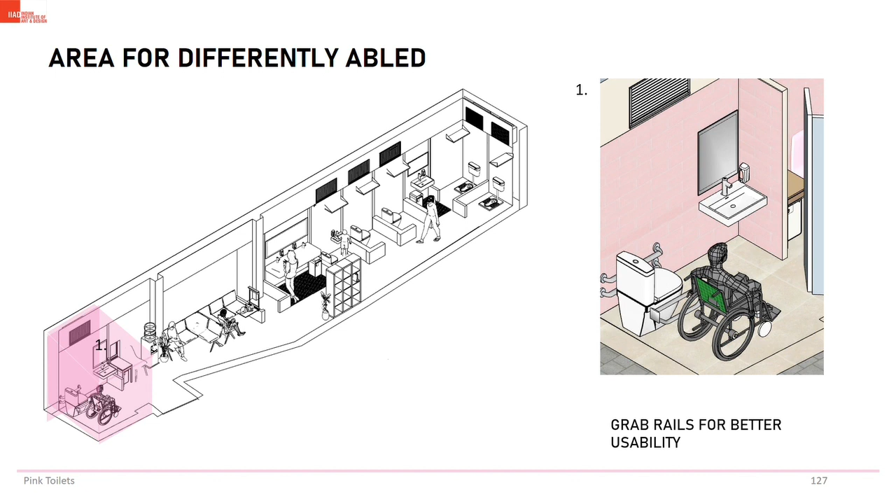In the second proposed plan, the entrance has changed from north direction to east, where the existing door was previously used for ventilation beside Munirka market. This solves the major concern of privacy that was caused by the male guards in the taxi booth. This plan considers the needs of all our target audience, so we have incorporated a toilet for differently abled, which was needed and was missing in the existing site. The toilet is placed near the entrance for easy access according to the considered standards. There was a sitting for the attendant at the entrance without a table or such in the existing site. So an attendant has been provided with a dedicated sitting area where she could sit comfortably and monitor all the activities happening in the area.

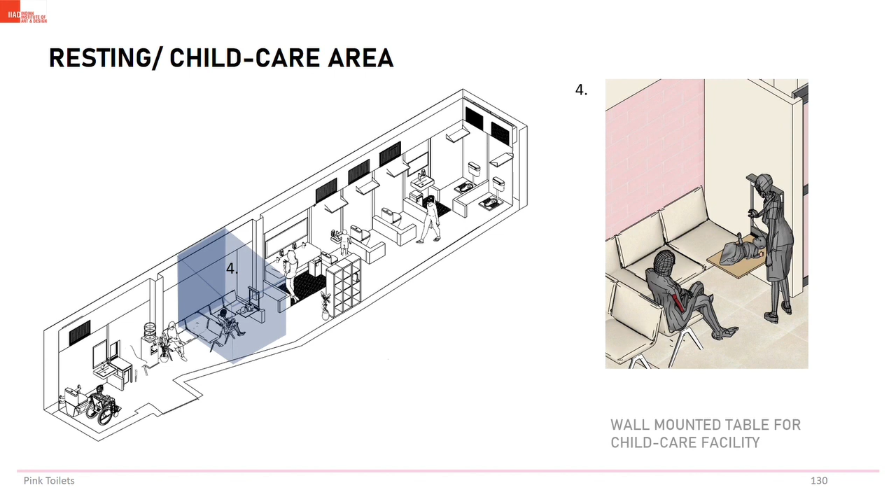She can conveniently help the differently abled at the same time without losing track of what is happening in the other zones. While it is important to provide facilities for all the activities, likewise, a common area for waiting, resting, and childcare is provided to create a socially inclusive space. Beside this, a changing room has been provided, which was also there in the existing site. This is near the resting area so that it can be in the dry zone. It has been incorporated because of the need raised during interviews and surveys.

The number of sinks has also been increased from 2 to 4, of which 3 are near the western cubicles and 1 is beside the Indian cubicle for easy access. Just opposite the basin area, a separate open storage has been provided, considering the market nearby. The bottom part of the storage is closed, one shelf to give storage space for the attendant to keep her stuff, and the bottom shelf to store the cleaning supplies.

Interviews with a small kid on the site also revealed that they avoid using these public restrooms due to the fear of falling into the adult-sized toilets. Hence, a toilet for children has been provided along with a separate basin inside the cubicles according to the required measurements so that they can use the toilet safely.

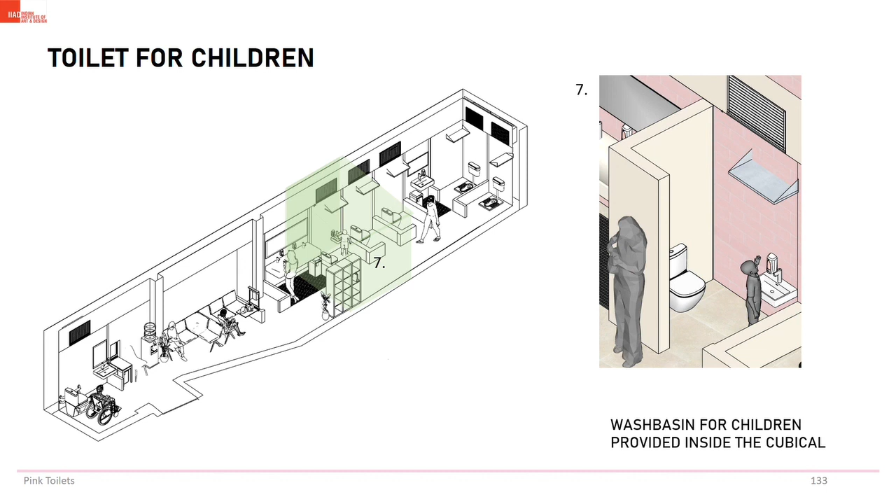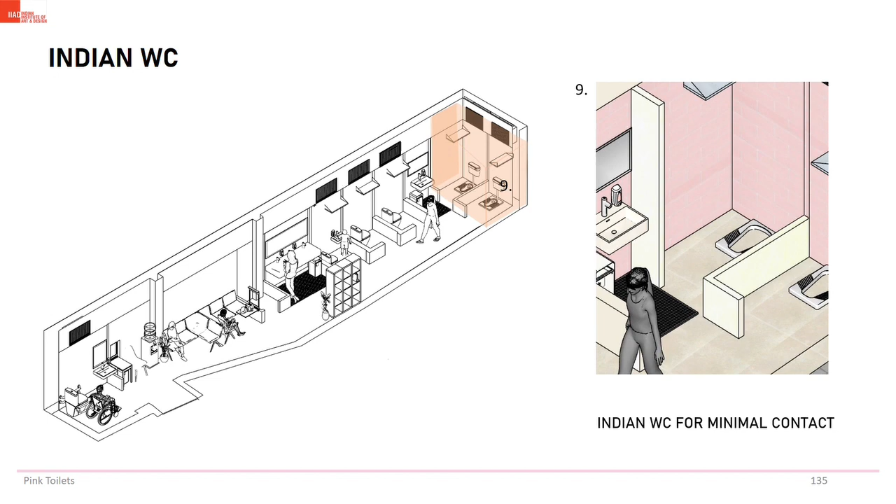The two wall-mounted Western WCs are provided catering to the users, as they are used by the majority. They are comfortable to use as one can easily sit and use them. Wall-mounted WCs help in cleaning and maintenance of the whole cubicle. The two Indian WCs have also been provided beside a basin, as almost half of the users demand the facility for it. It is mainly because it has minimal contact with the body. They were previously not incorporated in the toilet.

This is the drainage system that we are proposing with this plan. The waste pipe, soil pipe, along with floor drains and floor traps have been provided in a way that they can be easily cleaned or maintained. The two gully traps are added outside the site that directly connect to the inspection chambers. These inspection chambers are further connected to the already existing municipal corporation manholes.

Talking about the electrical and lighting, all the wires are connected to one switchboard near the attendant area so that she can easily access and regulate it. Another switchboard is given near the wash basin with a fan, which can be helpful while cleaning the area. Individual ceiling lights have also been provided in each cubicle.

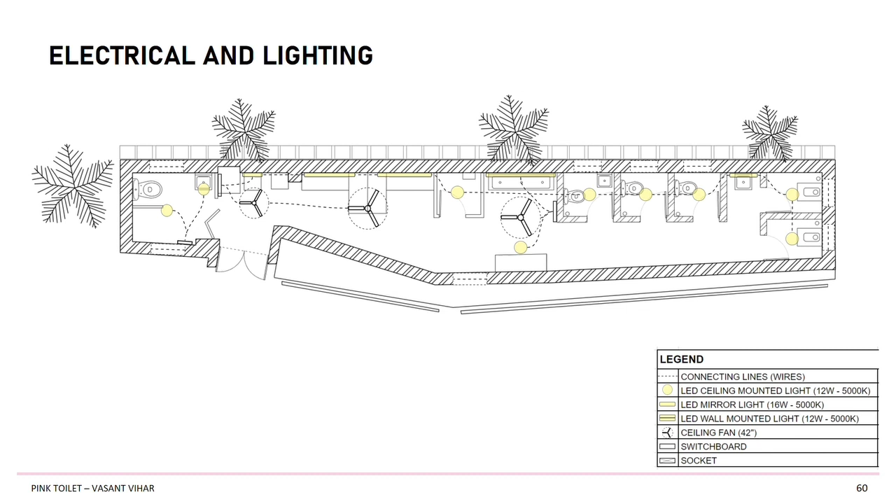We are proposing two color palettes which we have taken for our brand. The first one, used in Saket, has a major historic presence, as the color purple was initially considered a royal dye. The cost of producing the color was very high and it was rare among the kings and the queens. Coming to Rani pink, or fuchsia, it is a purplish red pink color. As purple was a royal symbol, fuchsia became the Rani color. The second palette for the Vasant Vihar site is derived through research and observation of already existing pink toilets. The color palette creates contrast in eye movement and is applied in a way that creates balance throughout.

These are the four proposed logos, out of which two are applied in Vasant Vihar site's branding and the other two are depicted in Saket's branding. The first logo represents a woman spreading her arms in a circle, depicting unity and strength. The second logo gives a clear demarcation of a woman's side face with a similar stroke representing femininity, freedom, and strength. While designing the other two logos, our aim was to make them easy to understand for the user group, and we also Indianized the logos by adding elements such as Juda, Bindi, and Bali so the community using the facility could relate to the logo and a sense of trust could be built.

These are the considered branding design parameters that have been derived through research and observation. Firstly, focusing on eradicating communication barriers and making it more visually communicative while taking a step towards digitalization by incorporating QR codes. This further shows how we have considered creating awareness about the correct use of the facilities and also educating people about the Pink Toilet initiative and the do's and don'ts of the facilities provided. We have also taken a step towards educating women about various issues, which include how to use the sanitary pad incinerators, management of the menstrual cycle, and breast cancer.

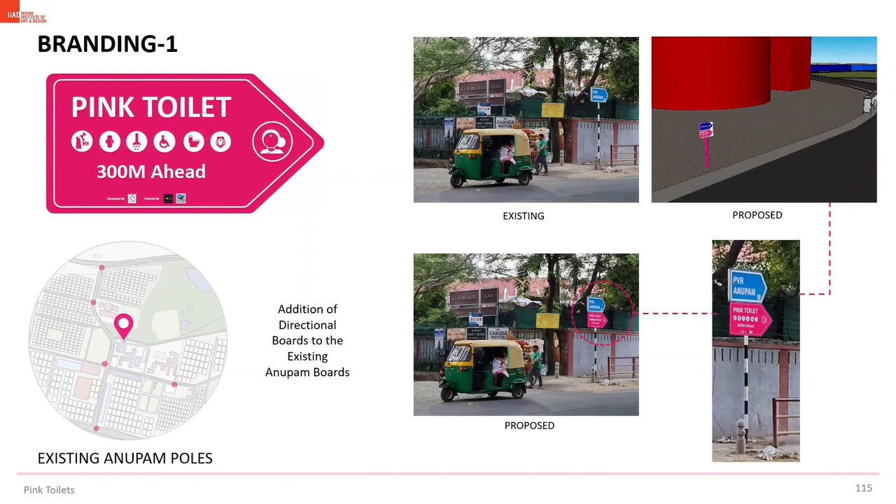Second, this board is majorly for distance purpose. The visual of the board has been placed in such a way that the person can understand it easily. These boards have been placed with the existing Anupam advertisement. This board is used for directional purpose, which is placed on the bus stop and the footpath. These are the second set of iterations which we are proposing for our site.

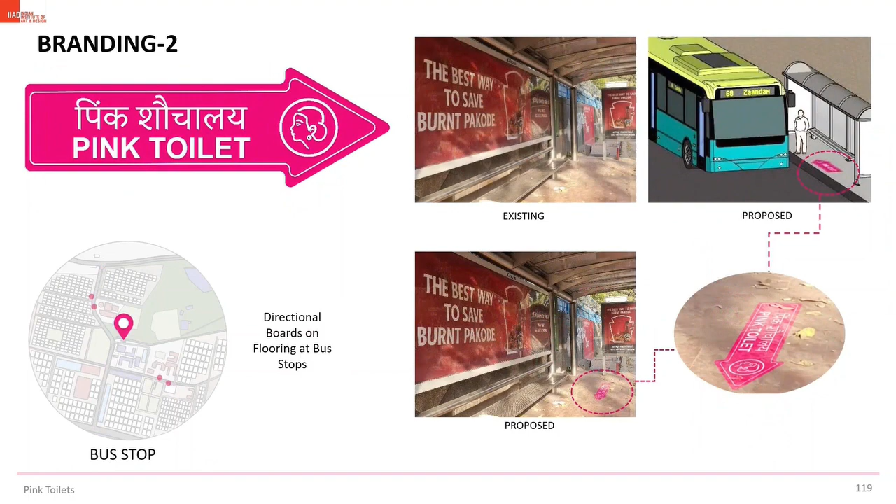These are the posters that have been used as signage for wayfinding of the site to make it easily accessible and visible to all the users. These are the floor stickers which will make a way through the footpath leading towards the entrance. This poster will be placed at different intervals from the site for people to easily know the way towards the site. This will be placed on the various poles.

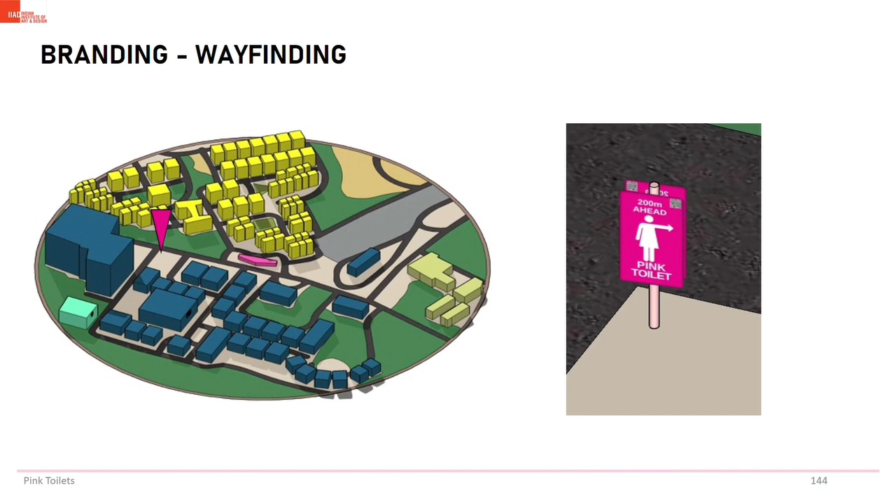This is a poster explaining the facilities that have been provided at the site. This will be placed on already existing poles beside the police taxi booth. This is the poster placed near the proposed entrance, which highlights the user group that it caters to and that it is a free toilet. Presenting the application of both the logos and branding on the site.

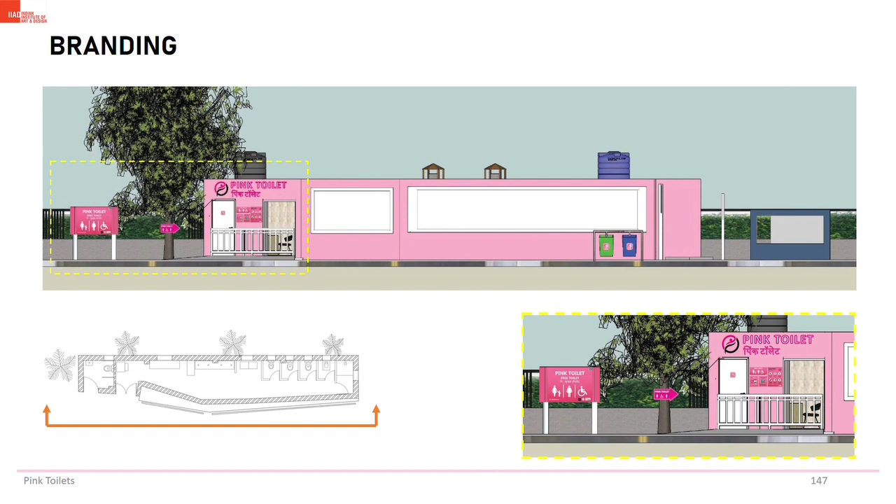This is the application of the first proposed logo with branding on various sections of the site. This is the exterior view of the site which depicts the placement of the proposed branding, making it friendly for all types of users and eradicating all kinds of communication barriers. In the zoom-in view, the poster of it being a free toilet and the users it caters to is highlighted.

The other poster signifies the facilities that are provided along with the QR code for user feedback for the toilet experience. The posters are following the color scheme mentioned previously. This is the interior view of the site wherein placement of branding has been highlighted with the required posters and signages.

This is the application of the second proposed logo with branding on the various sections of the site. This is the exterior view of the site which explains the placement of the proposed branding, making it friendly for all types of users and eradicating all kinds of communication barriers. This is the zoom-in view of the previous slide for a better understanding.

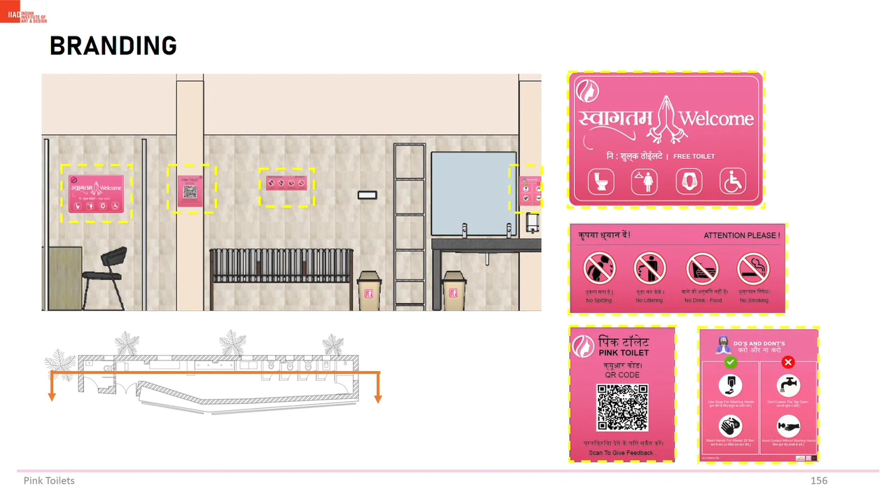This is the interior view of the site where the placement of branding has been highlighted with the required posters and signages. This is a zoom-in view of the previous slide. This interior view of the opposite wall makes users aware of the do's and don'ts in the space. This is the zoom-in view of the previous slide.